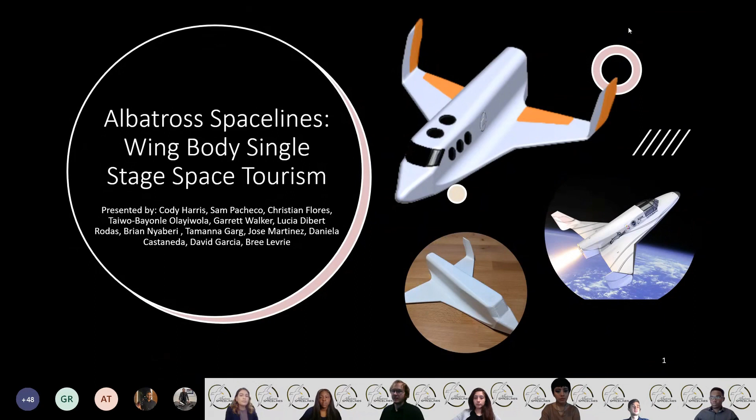Beginning with the history and background of space tourism, we start with the beginning of human spaceflight in the original race to space, 60 years ago, when the Vostok spacecraft carried Yuri Gagarin to an apogee of 320 kilometers. 40 years and 16 days later, Denis Tito would become the first person to pay for a private flight to the ISS aboard a Russian Soyuz.

A few years later, the Ansari X Prize contest was held to encourage the development of reusable and privately funded designs that could lower the overall cost and risks of space travel. With their Spaceship 1 design, Mojave Aerospace Ventures won the $10 million prize. This contest jump-started the space tourism industry that led to the founding of companies such as Virgin Galactic and Blue Origin, and is the basis of the research performed for the analysis of wing body Spaceship UTA.

The specifics of the project are as follows: the vehicle must take off and land horizontally, undergoing rocket-powered flight to reach the Kármán line. During the vehicle's ascent, the 6 passengers and 2 crew members must not experience more than 3 Gs of acceleration, and during descent this limit is raised to 5 Gs.

The vehicle will be based at Mojave Air and Spaceport and will take off and land on its runway. A diagram of the vehicle's flight path is shown, and the key phases for the mission are takeoff and pull-up, boost, coast, apogee, reentry, glide, and landing.

Albatross Spacelines is comprised of a group of 12 engineers, each with a wide range of specialties encompassing 9 separate disciplines. During this project, each member focused on 2 different aspects of the vehicle design process, with 1 member leading each discipline and 1 chief engineer to coordinate the effort.

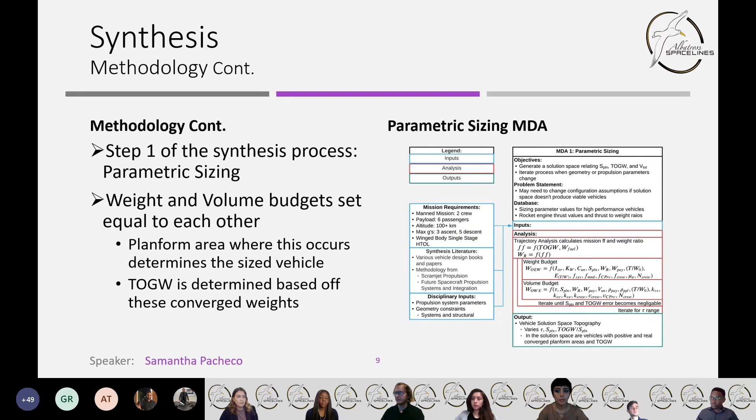Based on the parametric sizing results, a vehicle geometry is then altered such that the geometry of the vehicle matches the converged data. Under the configuration layout process, an existing vehicle geometry will be chosen as the baseline geometry. Once the geometry base has been set, the geometry is modified to accommodate the sized vehicle parameters as a result from the parametric sizing process.

The final step of synthesis is the configuration evaluation. This takes the data and geometries from the previous two steps and analyzes it through a flight phase analysis for the specific mission. At the beginning of this process, a specific flight path is chosen as well as the specific components of the vehicle weight.

The center of gravity and inertias of the vehicle are also calculated here. With these values known, the flight phase analysis can begin. Each flight phase starts with a trajectory and performance calculation and ends with stability control.

Shown here are the flight phases corresponding to the ascent of the vehicle from takeoff to the end of coast. If the vehicle can perform the ascent as required, then the descent calculations start from apogee to landing. The vehicle must meet all requirements set upon it to be deemed feasible.

If the vehicle can complete the flight, then a cost and safety analysis is performed. The purpose of this step is to determine if the vehicle is cost-effective and compliant with any FAA regulations that apply to it. If so, then it remains in the solution space as a feasible vehicle that can complete the mission.

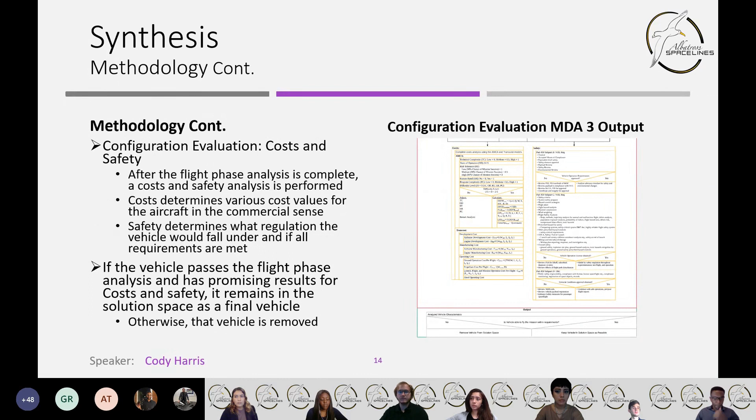With all these vehicles sized, let's now discuss the geometry discipline's impact on the solution space.

The geometry discipline has developed a database of dimensional data for several existing wing-body spaceplanes. The five aircraft that have been selected for analysis are the XCOR Lynx, the Boeing X-20, Virgin Galactic SpaceShip 2, C-251, and the Ariane AS-2.

CAD models of each of the aircraft have been created, and utilizing CAD software in MATLAB, codes are created to, A, scale the dimensions of each vehicle for a given planform area, and B, to generate a valid geometric solution space. The creation of the CAD models and database are aided by a literature review.

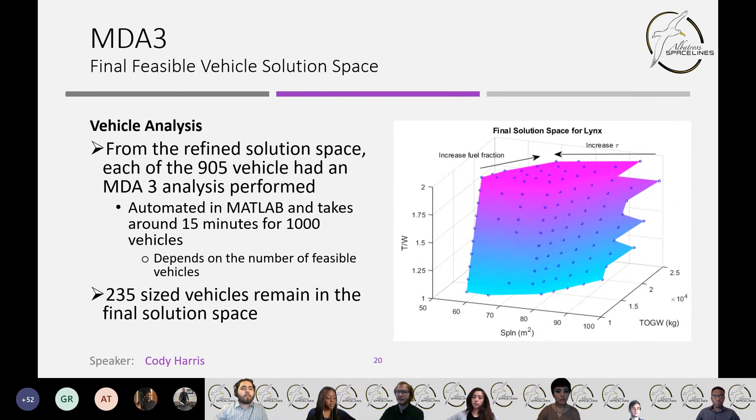This is approximately 24% of the preliminary solution space of vehicles. Of those that couldn't complete the mission, the vast majority failed due to either stability and control or performance issues.

For stability and control, the main issues were losing aircraft stability or controllability at some point during the mission, while performance had the issue of not reaching apogee due to a lack of fuel or experiencing too many Gs during boost. Insufficient runway length is also a factor that resulted in some vehicles being removed.

Compared to the XCOR Lynx and Spaceship 2, this solution space does contain values that are comparable to past vehicles designed for space tourism. Spaceship 2 is a second stage vehicle, which results in its required weight and planform area needed being lower than a single stage vehicle.

The XCOR Lynx was designed for a single passenger that did not experience microgravity as the passengers aboard our vehicle will, so its smaller values are still comparable, but not directly.

Lastly, the design point for this solution space has a tau value of 0.1578, fuel mass fraction of 0.575, and a thrust to weight of 1.05. Again, the Spaceship 2 and XCOR Lynx values are there for comparison.

As mentioned, upon synthesis application of the MDAs to each aircraft geometry, 4 of the 5 aircraft are deemed unfeasible for the mission. The X-20 reported too few feasible configurations, Spaceship 2's feathering mechanisms add unnecessary complexity, and both C-251 and AS-2 are too large to effectively complete the mission.

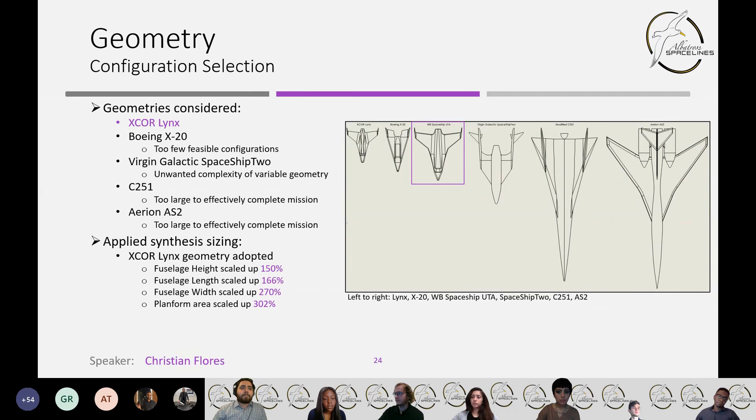This figure shows a top view of the original Lynx geometry and wing body Spaceship UTA.

The purpose behind the weights and balance discipline is to produce the lightest aircraft that will engage in safe flight, select an appropriate aircraft airframe and material composition of the vehicle, determine the maximum takeoff gross weight based on the empty fuel, payload, and crew weight, and evaluate the center of gravity throughout each flight phase in order to produce a CG envelope.

The primary literature used to develop the refined weights estimation methodology were Roskam's and Raymer's aircraft design texts. The primary literature used to develop the center of gravity methodology is Sadraey's aircraft design text.

Key inputs necessary to begin the refined weights analysis will come from the geometry and propulsion disciplines in the form of vehicle geometry and engine specifications, respectively. Once a material type and structural layout has been decided, the weight estimations of the takeoff gross weight and empty weight can be calculated using empirical aircraft component weight equations based on historical data regressions of past vehicles similar in mission to Wing-Body Spaceship UTA.

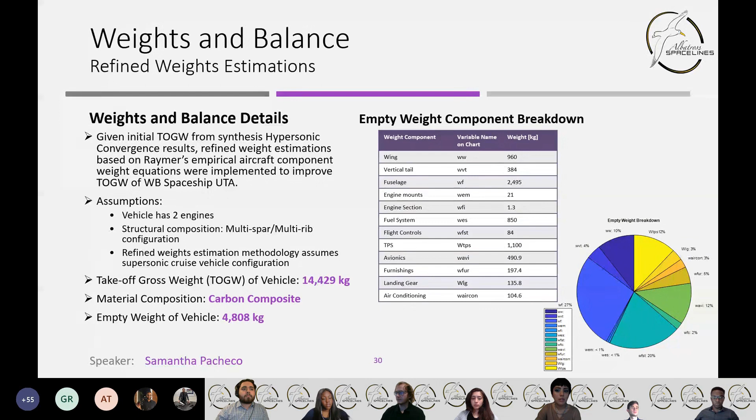The landing gear must withstand the maximum weight of the vehicle when performing various maneuvers during the taxi, takeoff, and landing phases. Therefore, the design, location, and geometry of the landing gear are needed to further analyze the vehicle.

The main literature used to develop the methodology in the IDA on the right is Sadraey's landing gear design buildup. For verification of the methodology, the Lynx landing gear design, a retractable tricycle configuration, is analyzed and scaled to the geometry of Wing-Body Spaceship UTA.

The following images present the main center of gravity locations calculated at the empty and takeoff gross weight of the vehicle. The most aft and most forward CG locations were also calculated to develop the center of gravity envelope. As shown below, once fuel has been added to the back of the vehicle, the CG shifts aft, yet maintains within the bounds of the most forward and most aft CG locations.

Now we will begin the flight phase analysis, starting with the takeoff phase. The primary objective of the takeoff is to verify the vehicle can produce enough lift to actually take off the runway. In addition, the vehicle must also be able to have the elevons rotate the vehicle properly around the main gear. The primary disciplines responsible for this phase are trajectory performance, propulsion, aerodynamics, and stability and control.

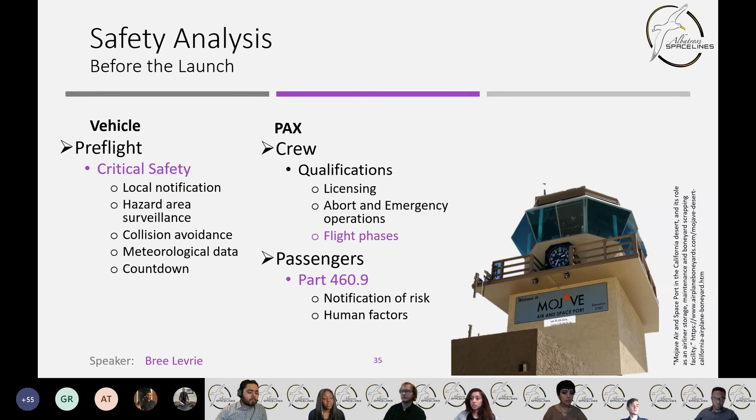The takeoff performance phase is imperative in the design process because it's responsible for sizing the wing of the vehicle. The main objectives of this analysis is to ensure that the vehicle is able to take off within the provided field length. The field length from Mojave Air and Spaceport is approximately 3,800 meters.

Nicolai's takeoff methodology is used to derive an IDA for the takeoff performance, as can be shown on the right. To verify the Nicolai methodology, this analysis is implemented in the Lockheed L1011 TriStar.

The inputs for the vehicle are shown in the top right table. With those inputs, imperative takeoff parameters such as takeoff velocity and total takeoff distance can be determined. Those calculations were compared to verification data, and as can be observed, all the percent errors are at or below 1%. This gives way for the methodology to be implemented on the selected vehicle configuration.

Wing-body Spaceship UTA is a significantly smaller vehicle compared to the L1011 TriStar. Hence, it was expected that the various takeoff parameters can be lower in comparison. As can be observed in the input table, the maximum lift coefficient is much smaller due to the smaller wingspan. Nevertheless, Wing-body Spaceship UTA takes off at a Mach of 0.21, which is well within the typical aircraft takeoff speed.

The selected vehicle configuration has a shorter takeoff distance of 1,773 meters. Nonetheless, the vehicle is able to take off with plenty of runway to spare. Now for the propulsion team to elaborate on the vehicle propulsion and the takeoff phase.

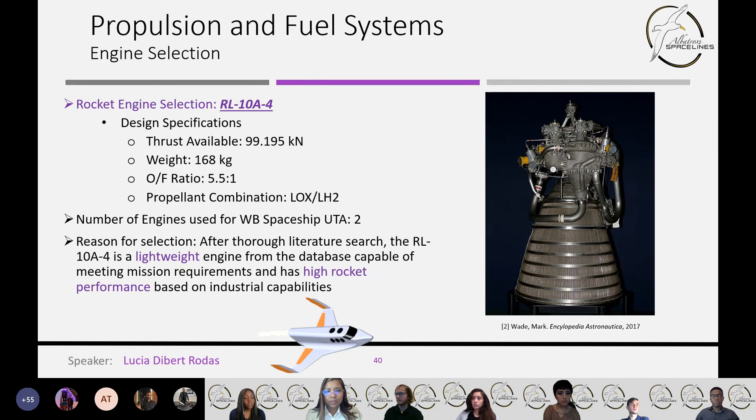Next will be aerodynamics to discuss the aerodynamic analysis for takeoff. The aerodynamic analysis at takeoff focuses on verifying that the lift generated will overcome the takeoff gross weight of the vehicle. A methodology and IDA diagram were developed as shown with primary literature methods including the US Stability and Control DATCOM and Spencer.

The subsonic lift and drag wing pitching moment slope methods were verified using the Space Shuttle data and a developed database of delta wings, and most percent error values were less than 15%. For Spaceship UTA, the necessary aerodynamic values were determined, and it was verified that the wing produces enough lift for takeoff.

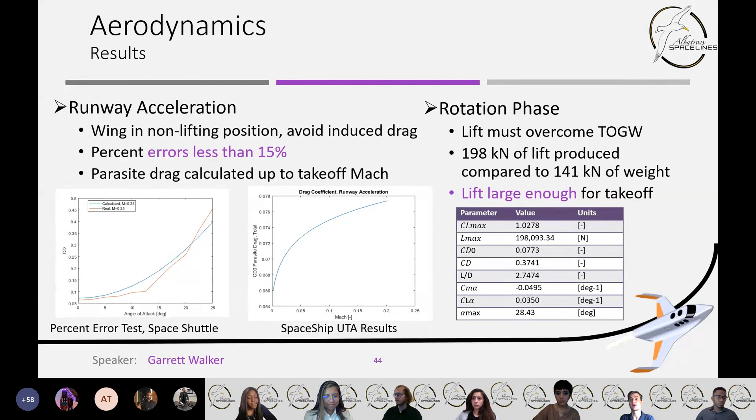And now on to stability and control. For the takeoff phase, the most critical part is ensuring the vehicle will be able to rotate the vehicle to the proper angle of attack required for takeoff.

The required lift and pitching control authorities are presented, and these variables were used to estimate the size of the elevons required based on the necessary pitching and lift control authorities by the elevon. The elevon control surface area was estimated to be approximately 11 meters squared with an elevon deflection of 15 degrees required to pitch up the vehicle.

And now for the next phase. The objectives of the boost phase involve determining the optimum trajectory that allows Spaceship UTA to achieve 100 kilometers with adequate thrust and stability. Furthermore, the loads experienced during this phase must not exceed 3 Gs.

The primary disciplines responsible for achieving these objectives are trajectory and performance, propulsion, aerodynamics, aerothermal, and stability and control.

To develop the trajectory for Spaceship UTA and analyze the performance during flight, the methods selected and verified were Vinh's trajectory model and the Nicolai and Raymer performance analysis methods. The Space Shuttle and X-15 were selected as verification vehicles because of their low aspect ratio wings and high altitude performance capabilities. Additionally, the X-15 weight was close to the goal weight of the Spaceship UTA. Based on the closeness of the calculated and literature trajectory plots, the methods were considered viable for the Spaceship UTA's analysis.

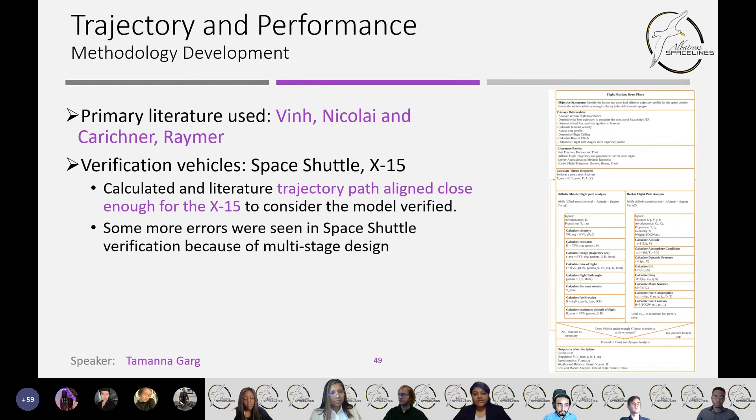After constraint analysis, results dictated that in order to achieve the mission altitude of 100 kilometers, Spaceship UTA must fly on a flight path angle of 60 degrees and requires a thrust of nearly 147 kilonewtons. With these characteristics, the vehicle achieved a propellant mass to total mass ratio of 0.575, which is in the average range for the vehicles of this size.

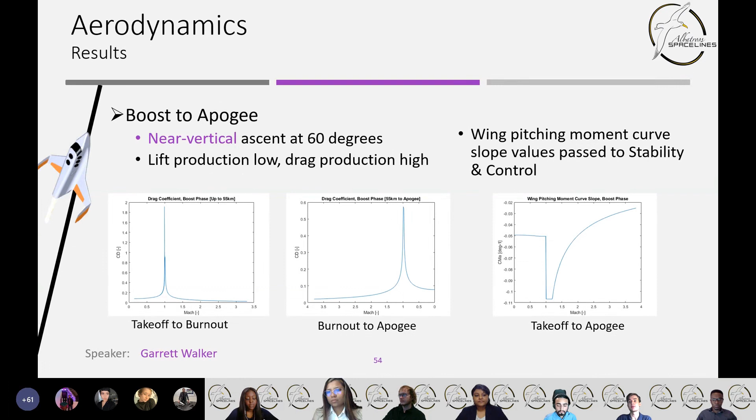From literature review, it is learned that one of the limits of the flight envelope is aerodynamic heating. At high Mach numbers, an aircraft heats up due to the conversion of kinetic energy of the air into thermal energy. The increase in thermal energy is represented by the increase in temperature, which occurs due to the heat transfer from the air to the aircraft through convection.

The critical regions of the vehicle are the stagnation points and lower surfaces. Because of this, the Aerothermal Discipline is in charge of estimating the heating rate at the critical regions of the vehicle. The vehicle used for method verification is the Space Shuttle.

David, I can't hear you.

For the boost phase ascent, US Air Force DATCOM was used as the main reference and obtained the roll and yaw stability derivatives. Delta wing aircraft found within the references of DATCOM were used as verification of the DATCOM equations and methodologies. Errors would range between 5 to 15% depending on the wing configuration and other various required geometric inputs. Aerodynamic parameters such as the wing pitching moment and the coefficient of lift with respect to the angle of attack were obtained from the aerodynamics discipline.

The vehicle was found to be stable for the 3 stability parameters in the subsonic regime. However, as the vehicle crossed into the supersonic regime, the vehicle became less stable, yet still within the static stability requirements. This was expected and can be mitigated through an active control system as seen in numerous modern aircraft and wing body configurations. Now to the next phase.

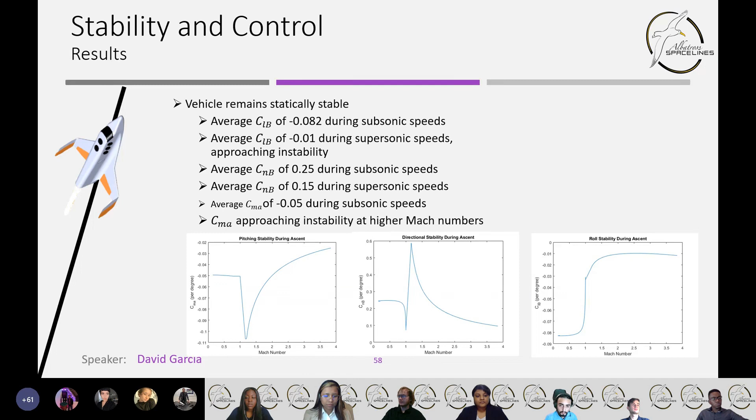In unpowered ascent phase or coast, the disciplines of trajectory performance and weight and balance ensure that the vehicle maintains enough momentum to reach apogee and that the loads remain below 3 Gs.

Once the engine shuts off and the vehicle enters its unpowered coast phase, the weight after the boost phase was recorded. Because the entirety of the fuel was consumed during its burn time, the weight after the boost phase comprises only the empty weight, RCS fuel, weight of the passengers, and weight of the crew, at a value of approximately 7,095 kilograms. The CG shifts forward approximately to the location of the empty CG location as the back of the vehicle has become lighter.

And now for the phase that everyone enjoys the most, apogee. During the zero gravity phase, Albatross Spacelines aims to maximize the amount of time customers get to spend in the zero-G environment. Additionally, it has determined how much fuel is needed for the reaction control system and the corresponding thrust forces. The disciplines responsible for these calculations are trajectory performance and stability and control.

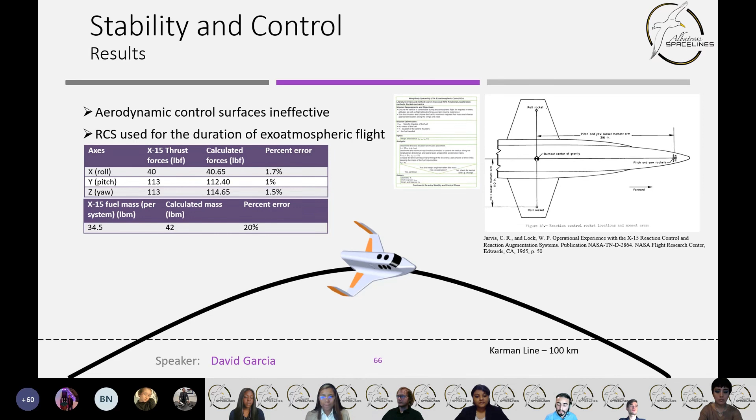Here, the required thrust forces of the reaction control system for the 3 rotational axes are given, along with the minimum required mass of the system propellant of 200 kilograms.

With the passengers strapped back into their seat, we can begin reentry. In this flight phase, we ensure that wing body Spaceship UTA is able to maintain a descent trajectory with an angle of attack high enough for it to reach back to the runway while keeping load factors under 5 Gs and remaining stable. Additionally, it is imperative to develop a thermal protection system that is able to withstand the high temperatures associated with atmospheric reentry. The primary disciplines that work on these objectives are trajectory performance, aerodynamics, aerothermal, and stability and control.

The trajectory and performance discipline will be in charge of determining key values that will be used by aerodynamics, aerothermodynamics, and stability and control disciplines. Griffin methodology was used to calculate the velocity profile and associated altitudes, and Regan methodology was used to find the deceleration values and the time.

The reentry analysis begins at apogee and will fall down into the range of 45 kilometers. This is mainly due to assumptions that were made within the chosen methods. A reentry skip maneuver is done for the Spaceship UTA mission, which will allow for an increase in speed and will give a max Mach number of 3.57.

This occurs at a higher altitude. This also ensures that the G-force deceleration that is felt will peak at 2.3 Gs and will then have a second peak value. This G-force value is smaller than the allowable max 5G limit set by the mission, and the total reentry time will be 423 seconds, or roughly 7 minutes.

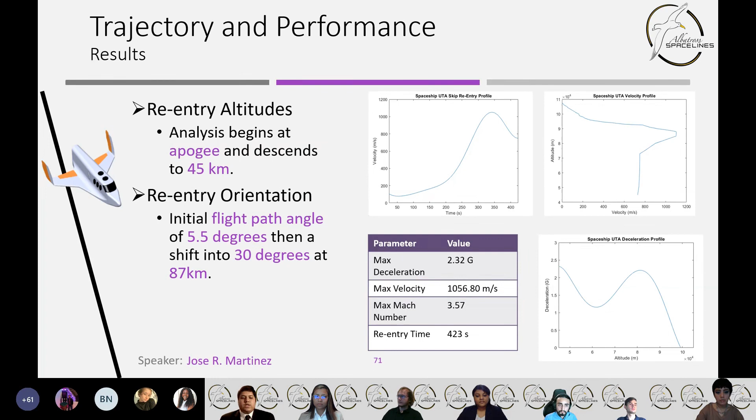Now I'll pass it on to the trajectory of the glide phase. A trajectory and performance glide methodology was developed based on primary literature sources, including Raymer, Roskam, and Nicolai.

The space shuttle was used as a surrogate vehicle to verify the accuracy of the velocity time and velocity altitude history methods, and most percent error values were below the 15% threshold. The method was used to calculate the glide velocity profile history for Spaceship UTA.

During glide, Spaceship UTA flies a constant lift-to-drag ratio equilibrium flight from 45 kilometers down to the landing approach, where it is operating at CL max before touchdown.

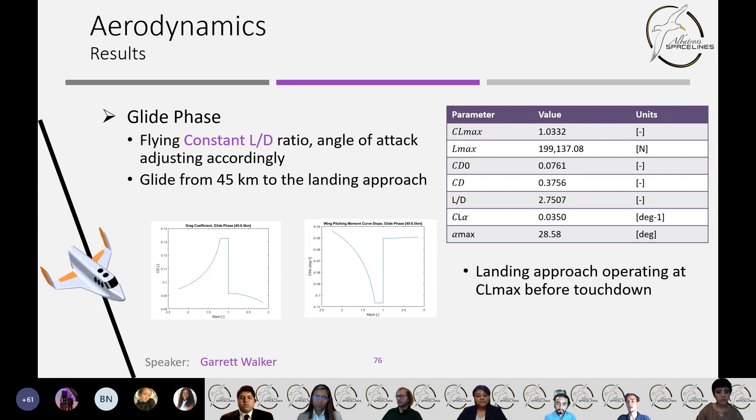And now on to aerothermal. The aerothermal discipline is in charge of calculating heat flux values and surface temperatures during the descending phase. The calculations will then be taken into consideration when sizing the thermal protection system.

Quinn methodology will be used to calculate the heat flux profiles experienced, and Fink methodology will be used to calculate the surface temperatures.

The heat flux profile for the lower surface of the Spaceship UTA vehicle was calculated assuming a free laminar flow, which will give a max value of about 62 kilowatts per meter squared. But the most important heat flux value that should be checked would be the stagnation heat flux, which was calculated to have a max value of 113 kilowatts per meter squared.

The max surface temperature measured for the lower surface of Spaceship UTA was 880 Kelvin. With these major aerothermal forces, a thermal protection system will be required for this mission.

But due to a carbon-based structure, the thermal protection system can be limited to the most vulnerable parts of Spaceship UTA. This includes the nose, the leading wing edges, and the vertical stabilizers. The material chosen for the TPS was carbon-reinforced silicon carbide.

The main reason this material was chosen is due to the ceramic matrix composite, which gives it low weight and high thermal conductivity. It is also oxidation resistant, which is a bonus. The total thermal protection system weight applied to Spaceship UTA is approximately 1,100 kilograms.

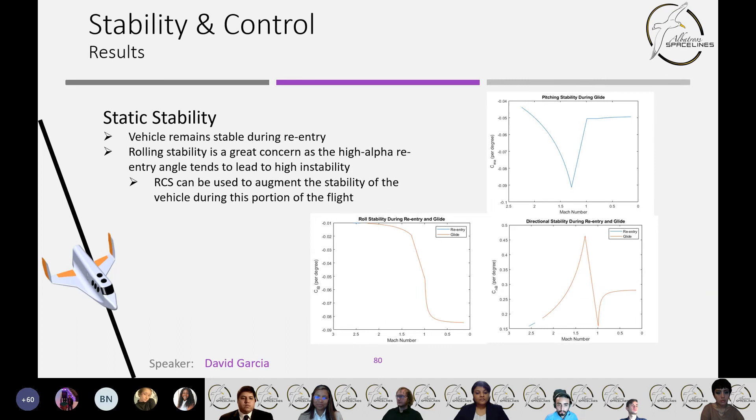Finally, in the venture to come back home to Mojave, trajectory and performance must ensure that the landing phase sees the vehicle approach at a safe speed and not stall. Stability control helps complete this objective by sizing the rudder to meet Part 25 landing requirements.

The main objectives of the landing phase are to ensure that Spaceship UTA can complete a safe landing at Mojave Air and Spaceport. The main methodology chosen was ROSKAM, which gives different velocity and range values.

The main velocities calculated in the landing phase are the approach and touchdown velocities. The most important factor is to ensure that the stall velocity will always be below these values. The stall velocity was calculated to be 33.38 meters per second, and the landing field length was calculated to be 1,146.5 meters. This means Spaceship UTA will be acceptable for landing at Mojave Air and Spaceport.

Landing analysis for aerodynamics focuses on determining aerodynamic values on approach through touchdown. Similar methods were used as in the takeoff analysis and applied to the landing analysis.

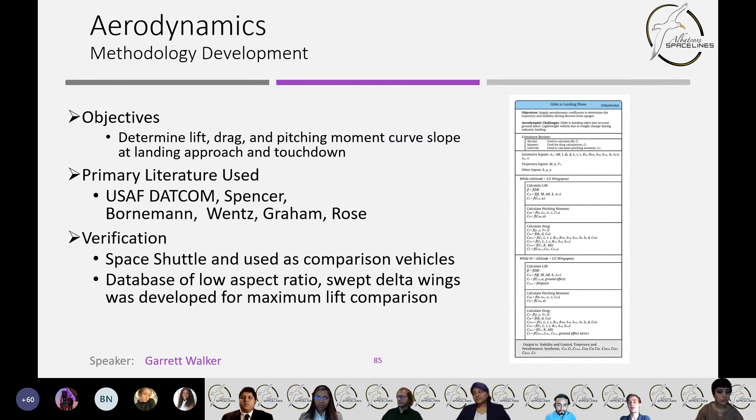CL max produced during landing is sufficient due to the loss of mass from the fuel burned. The calculated aerodynamic values were output to the necessary disciplines. Now on to stability and control.

It was decided that wing body Spaceship UTA was to have all moving tail surfaces due to the supersonic flight capabilities and need for the vertical tails to be effective during supersonic flight. With this, Spaceship UTA was evaluated to be able to perform a safe crosswind landing with a crab angle of 4 degrees and a rudder deflection of 2 degrees for a crosswind speed of 15 knots.

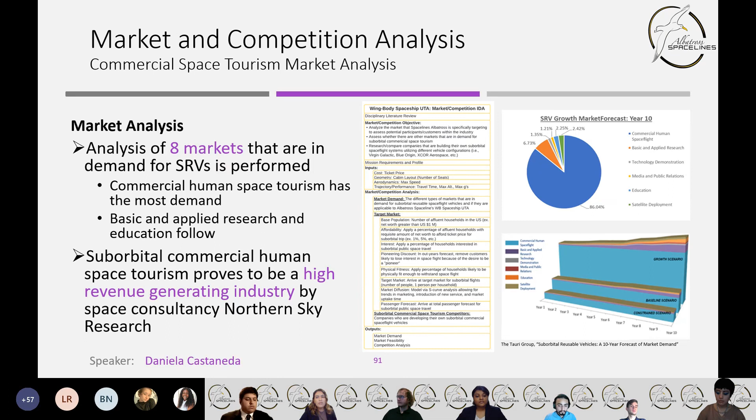Virgin Galactic is the main competitor that Albatross Spacelines will be competing against, in which their traditional configuration of a 2-stage vehicle is utilized, which resulted in lighter vehicle weight. However, Albatross Spaceline's attempt at a single-stage horizontal takeoff and landing rocket-powered spaceflight vehicle proves to be highly competitive against Spaceship 2 with the current technology.

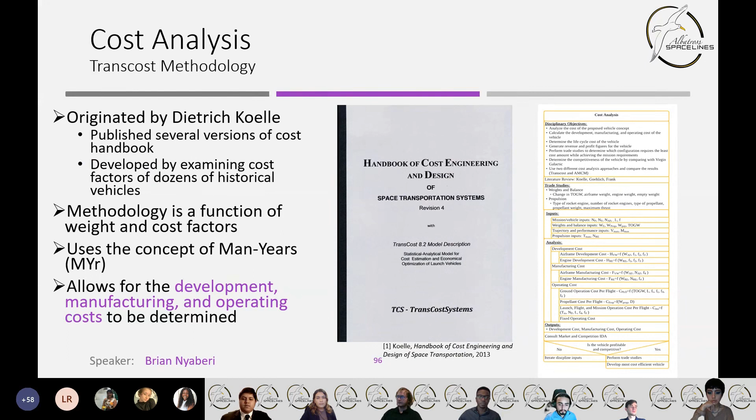With verification of the transcost method, the analysis was applied to the final configuration of wing-body Spaceship UTA. The development cost is $1.5 billion, and the manufacturing cost is approximately $322 million for one vehicle. This is pricier than Spaceship 2, but was expected due to the higher weight and more engines. However, the operating cost per flight is lower because of the difference in propellant.

Using liquid propellant is significantly less expensive compared to solid propellant.

With the ticket price per customer set to $225,000, Albatross Spacelines also generates a higher profit than Virgin Galactic. This analysis shows that a single-stage to suborbit system is financially viable, even more than the current two-stage system. Now I'll pass it to Bree for the final safety analysis.

The objective of the safety analysis is to ensure that the vehicle, crew, and passengers, surrounding environment, and company personnel abide by regulations set in place to maintain a controlled area and a controlled flight for the intended mission. This includes applying the correct regulations for both ground and flight safety.

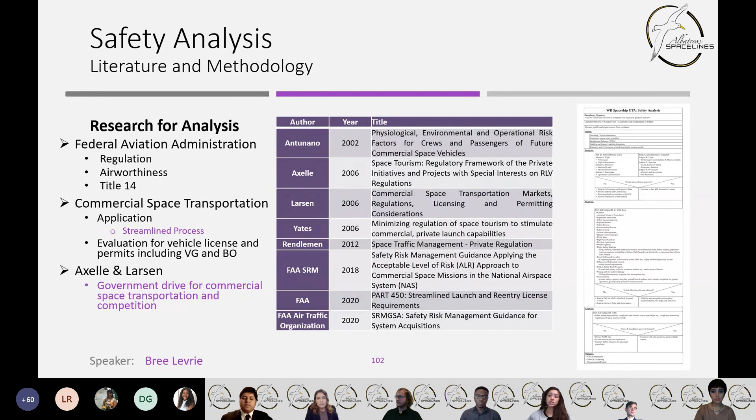The calculated and verified ground run from trajectory and performance coincides with that of the Mojave runway to be used. For the takeoff flight phase, the launch angle limits were in accordance with Part 417-125, where the nominal launch elevation angle did not exceed 85 degrees.

For the powered ascent boost part of the launch phase, the gravitational force acting on the vertical plane of the body, or amount of G's pulled, was less than the limits at which there is a potential compromise within the body.

Human safety at Apogee is what the two-week training prior to the flight prepares passengers for. This point in the flight phase is where effects of radiation and microgravity come into concern. Solar or galactic cosmic radiation is considered, but for the mere time of 4.5 minutes spent at Apogee, this does not imply that passengers are susceptible to high radiation doses.

The microgravity, however, can have musculoskeletal effects, disruption of bodily fluid, gastrointestinal effects, and also cardiovascular effects, which means that, unfortunately, grandma cannot enjoy a ride on wing-body Spaceship UTA.

For the safety aspect included in the re-entry and glide phase, Part 450 was followed. It states that the permanent re-entry site must be declared, and per the mission requirements, Mojave Air and Spaceport is licensed and cleared for re-entry and landing.

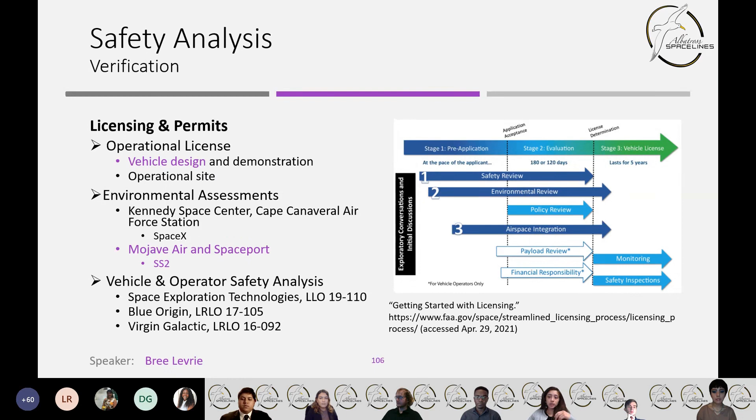Overall, the design point chosen by Albatross Spacelines is capable of completing the mission within the given requirements while also being cost-effective and following all FAA regulations. If this vehicle were to enter the space tourism market, it would undoubtedly provide competition to Virgin Galactic's Spaceship 2. With that, that concludes Albatross Spacelines' presentation. Thank you.

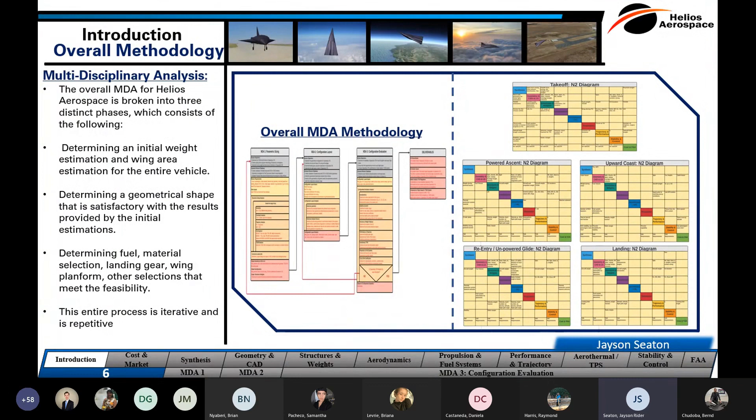I will now hand the presentation over to our cost and market team. Thank you, Jayson. My name is True, and I'm the lead engineer for the cost and market discipline.

The rising era of the space age promises enormous potential demand for space tourism services, sparking business competition between travel companies while introducing new major markets for manufacturing and operating companies to enable true space activities. The topics addressed in the cost analysis include identifying the current competitors for suborbital space tourism, how much it will cost to develop, produce, and operate Spaceship UTA in terms of its launch cost and ticket price per flight. Additionally, past to present cost models and literature on space access vehicles are reviewed to determine the challenges of analyzing cost for a suborbital vehicle, the design choices that impact cost, attempts to maximize competitiveness, and how Spaceship UTA compares to current market standards.

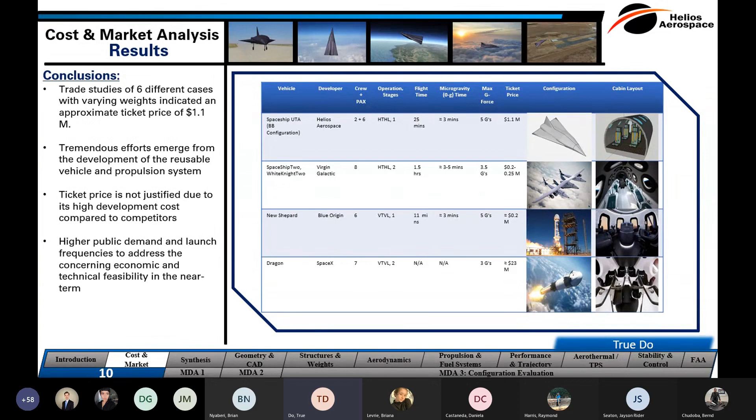Thank you, True. The synthesis discipline oversees the sizing of the aircraft, where the objective is to determine baseline design parameters that are required to build the geometry of Spaceship UTA.

In this phase, we will discuss topics such as how much the takeoff weight is estimated to be, what wing planform area is required for our vehicle, and what the total volume constraints are to integrate the entire vehicle to the geometry team. The overall design methodology for our vehicle, as mentioned in the introduction, was broken down into 3 phases.

As seen in the bottom tab, synthesis is the first phase of the design process. Part of the task of this discipline is to develop an overall design methodology, accomplished by creating necessary parameters from each discipline by flight phase, such as the time the paying customer will have in zero gravity.

Before jumping into the analysis, let's look at how the weight range was determined. The synthesis discipline looked into several suborbital vehicle configurations, such as sounding rockets, second-stage systems, and experimental data obtained from New Shepard. A linear trend line was approximated between these data points to estimate where Spaceship UTA's weight should be as a function of thrust. It was determined that Spaceship UTA would be within a 15,000 to 30,000 kilogram range.

Let's look at the results now. To verify the sizing analysis of Spaceship UTA, the SR-71 was sized to ensure that the dry weight, total volume, and upper hypersonic convergence parameters were estimating a percent error within a reasonable ballpark.

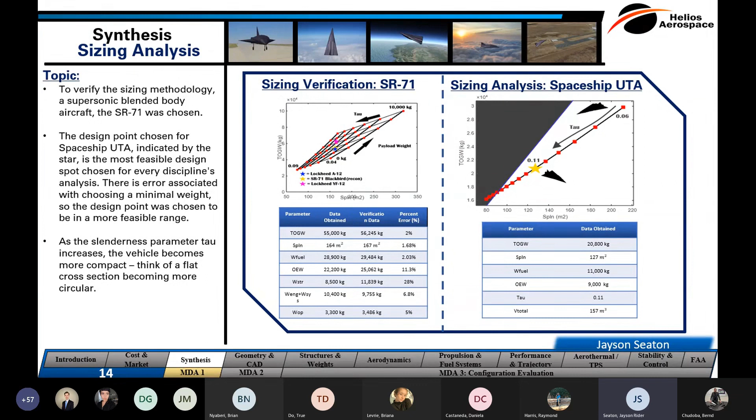I will now pass this presentation to the configuration layout team, which handles the second phase of the conceptual design process.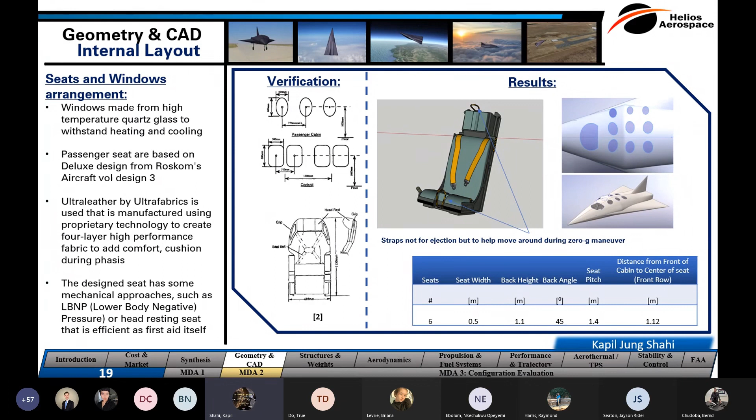The most relevant but challenging topic that should be considered is the sightseeing, passenger cabin layout, and some extra space for experiencing weightlessness. The internal cabin layout was finally designed, and the CAD model along with some renderings can be seen on the right side compared to that of the SpaceShipTwo design.

The bottom table shows the final exact dimensions of the internal layout. Next, Jose will be talking about wing selection.

Thank you, Kapil. In order to get up to speed with the shaping of the wing planform, a historical database of previous high-speed and space-access vehicles was developed.

Utilizing historical design case studies, one can obtain the lessons learned and valuable design guidelines that have been acquired over generations. A total of 12 aircraft were selected, which include the SR-71, Concorde, XB-70, Vulcan B-1, Sanger 2, and the X-24B. Geometrical data was obtained and trends were analyzed.

From these case studies, it was found that the majority of the high-speed aircraft incorporate a single or double delta wing with sweep angles ranging between 52 and 81 degrees, while aspect ratios range between 1.09 and 2.84. From theory, it was also determined that a subsonic leading edge was desirable for the entire flight profile.

This will result in a reduction of wave drag, which is ultimately desirable in order to maintain some excess thrust during the powered ascent phase. Failure to do so would result in a need for a larger propulsion system, which would increase the weight and so on, thus triggering an undesirable positive snowball effect.

Ultimately, Spaceship UTA's wing shape was selected to be a standard delta wing with a leading edge sweep of 74 degrees. This would ensure a subsonic leading edge throughout the flight profile, as well as ensure sufficient subsonic aerodynamic performance for critical phases such as takeoff and landing.

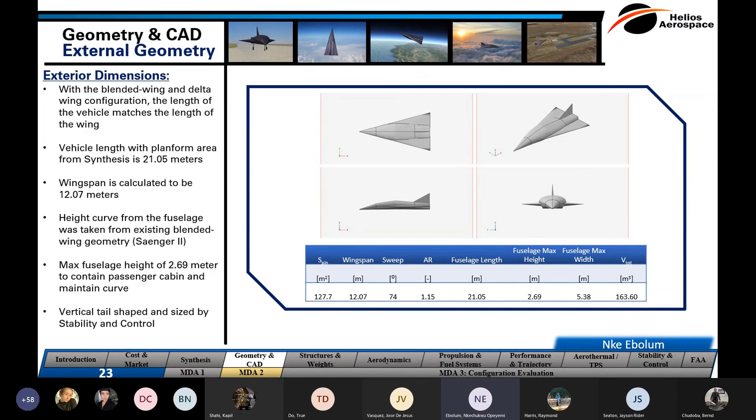For the interior layout, the size of the passenger cabin was determined prior to determining the exterior geometry to ensure the fuselage met the size needed to contain the cabin. The location of the cockpit was placed to give the pilots the best field of view required for passenger vehicles.

As the nose of the vehicle is larger than traditional vehicles, an external vision system will be necessary for the pilot's view forward. The sizing and shape of the fuel tanks and engine were determined by the propulsion discipline and passed along to the geometry discipline, placed within the exterior geometry.

The landing gear dimensions and placement were done in collaboration with the weights and balances discipline to determine the best location of the wheels and stress during takeoff and landing.

In the event that the interior components do not fit within the exterior geometry of the vehicle, the design process will then be iterated back to the determination of the locations of the components or the exterior geometry determination to ensure the geometry can fit the components while maintaining the sizing values from synthesis.

I'll now hand it over to Alejandro for weights.

Thank you, NK. Hello, my name is Alejandro Rodriguez, and I'm the Structure and Weights Team Lead. The Weights, Balance, and Structure Discipline's main objectives are to determine and track the weight and center of gravity location through all flight phases, as well as to determine the structural composition of the vehicle.

An overall discipline IDA was created to detail the methods to be used for the analysis necessary for the discipline. The disciplinary analysis is divided into 4 subdisciplines: weights, landing gear design, balance, and structure. Each IDA details the flow of inputs and outputs between subdisciplines, as well as the flow of inputs and outputs with other disciplines. I'll now hand it over to Ricardo for weights and landing gear analysis.

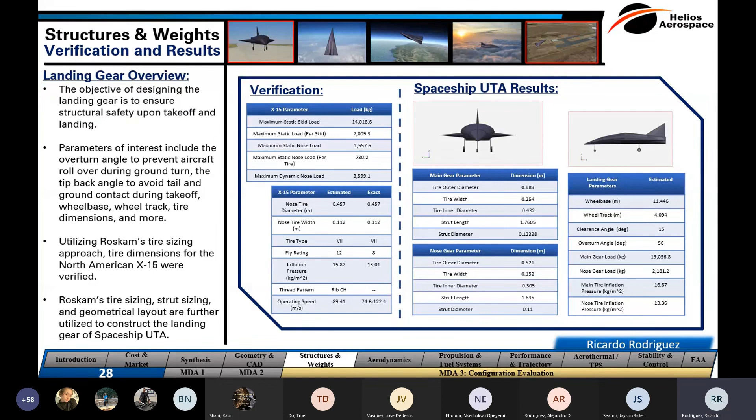Thank you, Ricardo. The determination of the center of gravity location begins with measuring the distance from a reference line to each component's center of gravity. In this case, the nose of the aircraft was chosen as the reference line. Using the calculated weights and these measured distances, the sum of all the moments of the vehicle's components can be determined. The total moment calculated is then divided by the total weight of the vehicle to determine the location of the center of gravity.

Using this method, the center of gravity location of the vehicle was found for all flight phases. At takeoff, the center of gravity is located at 12.74 meters aft of the nose, equivalent to 41.16% of the mean aerodynamic chord.

After liftoff, the landing gear is retracted. This shift in the landing gear's center of gravity shifts the overall center of gravity slightly aft. As fuel is consumed through the takeoff and powered ascent phases, the vehicle becomes lighter in the rear section where the fuel tanks are located. This shifts the center of gravity forward to about 10.85 meters aft of the nose.

I'll now hand it over to NK for structures.

Focus on the internal structure of the vehicle was placed on determining a possible structural configuration and the materials feasible for design. For material analysis, the materials were compared to one another through the stress-strain curve, their potential resulting weight, and their compatibility with one another.

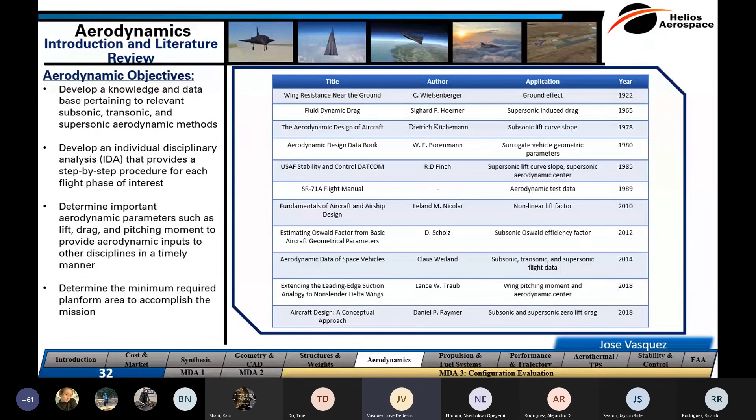Each flight phase has its own unique challenges and method applications. For example, the takeoff and landing phase consists of subsonic aerodynamics with considerations to ground effect and landing gear contribution. The powered and reentry phases consist of supersonic, transonic, and subsonic aerodynamics. Thus, handbook methods regarding these speed regimes must be obtained and verified in order to accurately model Spaceship UTA's aerodynamic performance throughout the entire flight profile.

For the verification process, the surrogate vehicles selected were the SR-71 and Space Shuttle Orbiter. The SR-71 was selected due to its blended body configuration, while the Space Shuttle Orbiter was selected to serve as a basis for the aerodynamic trends during the supersonic and subsonic glide.

Several subsonic methods were calculated and compared against test data. Ultimately, the lift methodology developed by Kuchemann and Raymer's drag buildup were selected for the subsonic aerodynamic tools.

In a similar fashion, the supersonic methods collected were tested and compared against available test data. For the supersonic regime, DATCOM's lift estimation process as well as Raymer's drag buildup led to the least amount of percent error, thus being selected for Spaceship UTA's aerodynamic model.

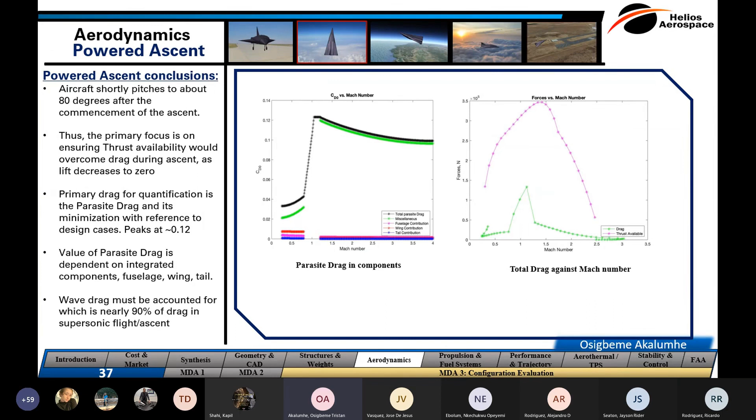Now I'll pass it back to Jose, who's going to talk about the reentry. Once the passengers have enjoyed the view of Earth from space, the vehicle begins its re-entry trajectory.

The aerodynamic coefficients calculated during this phase were then passed on to the trajectory and performance team in order to determine the best flight trajectory that meets all the design requirements imposed. I will now pass it on to my colleague Johnny to discuss the unpowered glide and landing phases.

Thank you, Jose. During the unpowered glide phase, L over D would be the most important characteristic. L over D will be used to maximize the range to return to the spaceport. L over D max will shift slightly as altitude changes.

To maximize the range, the vehicle should stay between angles of attack of 6 to 8 degrees. If the velocity decreases too much, the vehicle may angle down to gain additional velocity. The neutral point was determined to be 13.3 meters from the nose of the vehicle.

During the landing phase, touchdown velocity was calculated to be 95.5 meters per second. The maximum angle of attack for flare was reported to be 15 degrees. At this angle of attack, the usable CL max with ground effect included was determined to be 0.5587.

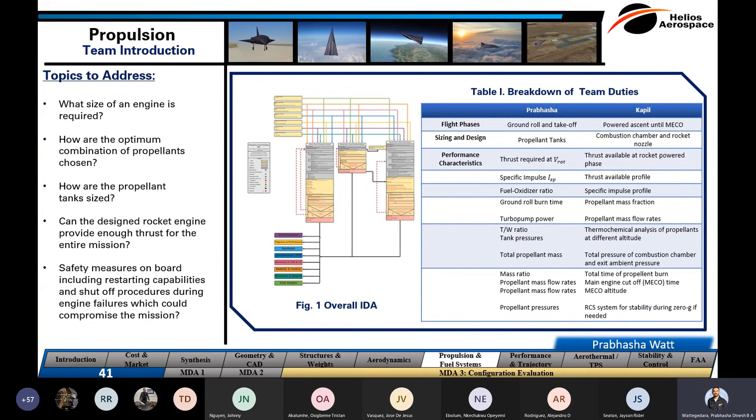Following extensive research, it was identified that a commercially off-the-shelf engine would do the job together with certain modifications to the overall propulsion system. To select the best engine, a comprehensive knowledge-based and database literature review was conducted to analyze the engine performance of commercially available engines. This literature review also included a separate section to oversee the propellants that can be used. Primary sources used in the engine design process were Mattingly, Sutton, and Breining's engine design manuals.

First, let's take a look at how the propellant tanks were designed. When designing propellant tanks, the primary properties that were looked at are the material, the weight restrictions, fuel and oxidizer volume requirements, and the tank bay area available.

Several material properties were analyzed for stainless steel, aluminum, carbon fiber, and titanium alloys. The best strength-to-weight material was titanium, but careful considerations were used in preparing the shell membrane to have maximum strength to withstand high in-flight pressures and ruptures. The interior of the tanks were equipped with grooved baffles to prevent sloshing and turbulence of the fluids inside.

The maximum pressure experienced by the tanks can reach up to 72 psi. Hence, a leak-before-burst concept will be installed, where the ports will exert pressure relief and notify the pilots of a potential hazard.

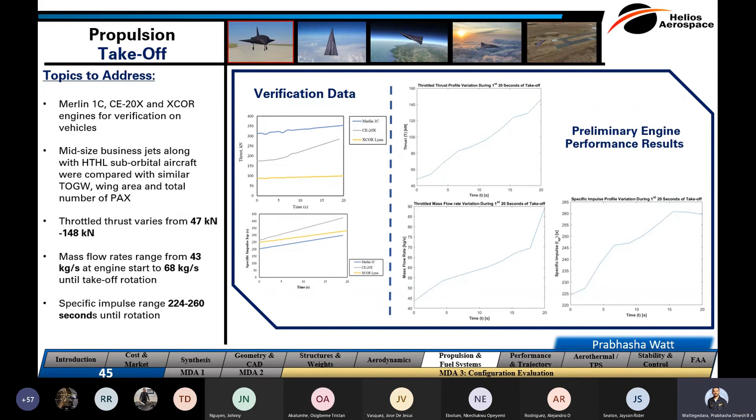Thanks, Prabhasha. My major purpose is to analyze and design the Spaceship UTA's propulsion system during the ascent phase after takeoff and ground roll. Primarily, propellant selection analysis was done on different propellants based on storability, economy, toxicity, and total energy content. RP1 and liquid oxygen combination was selected to be the best for the mission and finalized with Prabhasha.

Important parametric analysis was done using NASA CEA codes to get some conversion points for further calculation, as seen on the right. This can be verified from the fact that most suborbital vehicles developed or proposed use the RP1 liquid oxygen combination the most, from our literature review.

Since the engine sizing was based on an orbital Merlin 1D engine, the sizing had to be done to meet the suborbital mission requirements.

For the nozzle design, the method of characteristics was used, which is a numerical procedure for designing the contours of the rocket nozzle at the optimum expansion point.

Finally, the table shown consists of important output dimensions for the method of characteristics, for further calculation.

Like the Merlin 1D, this uses pintle injectors for injecting the propellants, and along with the use of turbopumps and valves, can throttle the flow rates, ultimately throttling the thrust of the rocket from 30% to about 90%.

Throughout the flight, based on the flight angle and load requirements from the stability and control discipline, the propellant flow rates were throttled, ranging from 68 to 98 kg per second.

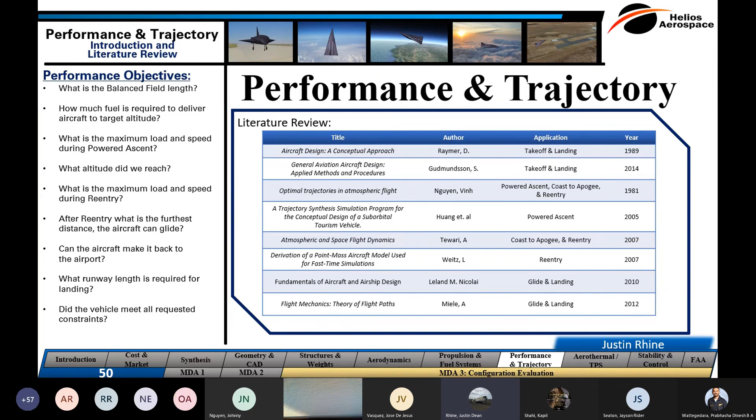The entirety of the method is displayed within the following master IDA. This particular discipline requires a wide range of inputs from varying disciplines and reports results to many of these respective disciplines. I would like to hand off to Osigbeme Akalumhe to discuss takeoff phase for the blended body configuration.

Thank you, Justin. So for our vehicle, we want to ensure that we can take off in an appropriate time and distance. With the provided inputs from the propulsion team, we were able to assess the amount of effort expended in this phase while meeting safety requirements as set by FAR 25.

Fortunately, the takeoff maneuver, which includes the ground roll, rotation, and transition, happens in about 40.91 seconds while burning a total of 1,763 kilograms of fuel.

An additional advantage with this vehicle is the fact that the balanced field length is within limits of what is available at the various spaceports in America. So this is actually a pretty good, excellent performing vehicle.

And now I'd love to pass it on to Justin, who's going to talk more about the powered ascent. Thank you, Ozzy.

For the next three phases, a 3-degree-of-freedom simulation for a point mass is used to track the vehicle. For verification of the powered ascent phase, characteristics of the SR-71, Kuchemann's lift-to-drag barrier equation, and thrust data from the propulsion team was used. The verification showed strong correlation with a trajectory synthesis report using the energy state approximation method described in Vinh's text.

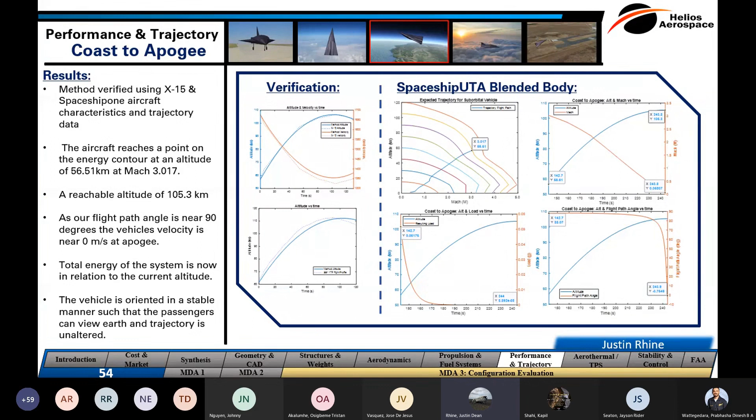Next slide, please. The method and verification for reentry is similar to the coast to apogee phase. X-15 and SpaceShipOne data is used to verify our method. The verification results correlate strongly with each vehicle's known inputs and trajectories.

For the blended body configuration, passengers experience a total microgravity time of 3 minutes over the duration of the flight. At 55 kilometers, passengers reach the highest speed during reentry. The Mach number at this point is approximately 2.9. Upon reaching this speed, the vehicle soon after begins decelerating.

The maximum load experienced by the passengers is 5 Gs. As the vehicle reaches an altitude of 22 kilometers, it has traveled approximately 30 kilometers from the airport and must now glide safely back. I'd like to hand off to Johnny Nguyen for glide and landing.

Thank you, Justin. The methodology used to analyze the performance of the vehicle during glide was verified using data from the conceptual space plane. The range must be maximized during this portion of the flight. Given the aerodynamics of the vehicle, it was determined that Spaceship UTA will be able to glide for a maximum of about 14.5 minutes and 123 kilometers once the vehicle re-enters the atmosphere.

This range is more than enough to bank and return to the spaceport. The average sink rate was found to be 22 meters per second. The average flight path angle was determined to be about 9 degrees. Next slide, please.

For the landing phase, stall velocity was calculated to be about 83 meters per second. The vehicle will need to stay above this velocity. During the approach segment, the vehicle will have a flight path angle of about 5 degrees. It will then flare at 6 degrees to touch down. The vehicle was determined to be able to touch down at 95 meters per second and complete the ground roll within 1,300 meters. This is well within the limits of Spaceport America and Mojave Air and Spaceport.

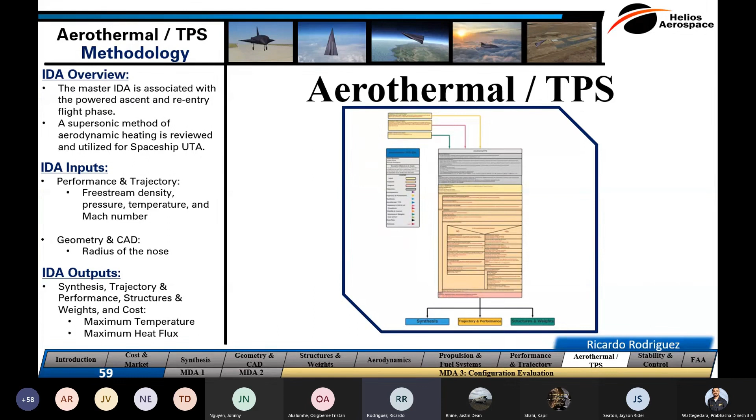Next slide, please. The objective of the thermal protection system is to protect the vehicle from aerodynamic heating, similar to Spaceship 1 and Spaceship 2. Spaceship UTA will utilize carbon fiber reinforced epoxy with a Nomex honeycomb core in low temperature regions. In high temperature regions such as the nose and wing leading edge, phenolic resin will be used due to its high heat tolerance. Next is Justin Rhine discussing the verification and results for Spaceship UTA.

Thank you, Ricardo. It was determined that the nose stagnation temperature and heat flux were of primary interest, as other areas of the aircraft were proportional, if not considerably lower. The method utilizes the convergence of convective and radiative heat rates through the calculation of the Stanton number for the nose of the aircraft. Verification was completed with known heat data for the X-33 and X-34 aircraft and trajectories. The results show strong correlation for supersonic speeds.

The results for the blended body configuration show a maximum temperature of 589 Kelvin during the powered ascent phase and a maximum temperature of 629 Kelvin during reentry. This analysis shows that the temperatures are well within the limits of the thermal protection system. I would like to hand off to Deji for stability and controls.

Thank you, Justin. During development of the Spaceship UTA blended wing body configuration, one discipline is tasked with analyzing vehicle motion throughout the mission profile. The stability and control team breaks down the blended wing body into 3 axes: longitudinal, lateral, and directional.

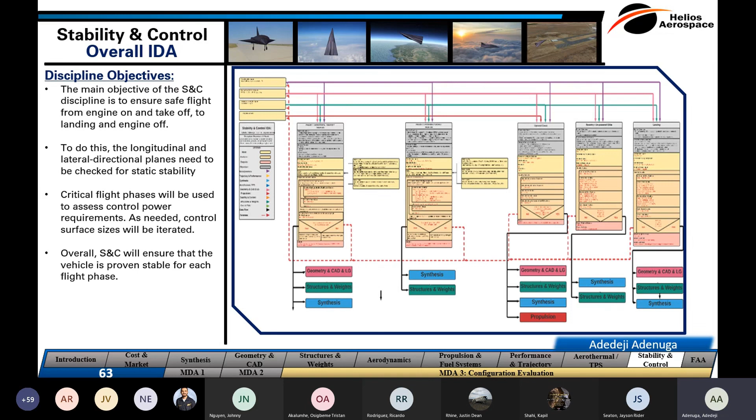Spaceship UTA blended wing body configuration features elevons and a rudder as primary control surface effectors. Left and right elevon deflection administers vehicle control in the longitudinal plane, and by differential deflection, vehicle control in the lateral plane is administered. The rudder takes care of directional control. The well-known method of volume coefficients is used to size the elevons and the vertical tail which houses the rudder. For this, a historical database is utilized, and from this pool of information, a surrogate vehicle is chosen and its volume coefficient is used to obtain control surface area. The Space Shuttle Orbiter is chosen as a surrogate vehicle, or you could call it a similar vehicle.

Now I hand it over to True for the horizontal takeoff. Thank you, Deji. Oh, sorry. No, you're good. One more slide.

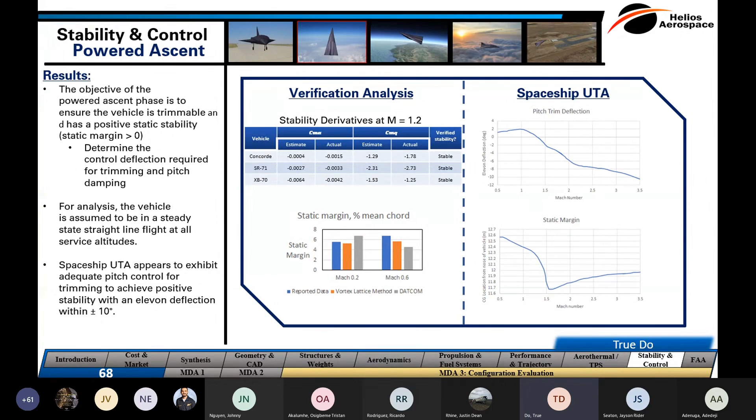Now I'll hand it over to Jason for the upward coast. Thank you, True. The upward coasting phase for this analysis involves determining the implications of inertial coupling and unstable rolling motion at high altitudes on Spaceship UTA.

A process was derived, and it was determined that if the roll rate is less than the pitch and yaw natural frequencies, then it is theoretically not bound to inertial coupling. It is important to note that aerodynamic control effectors are ineffective at this phase, so if the main stability is determined unstable, reaction control systems would need to be utilized.

Upon analyzing Spaceship UTA, it is determined that the rolling frequency made the vehicle unstable at these high altitudes, and that for the next phase, a reaction control system would need to be implemented. This was verified by determining the control torque required by the X-15's reaction control system.

With the control torque determined for Spaceship UTA, these thrusters would need to be placed such that the moment arm is equivalent or greater than the control torque requirement. I will now pass it off to Deji to discuss reentry and unpowered glide.

Thanks, Jason. Now, for the reentry analysis, a couple of factors were taken into consideration when picking a surrogate vehicle. We needed a supersonic vehicle capable of Mach 3 or in the neighborhood of Mach 3, a similar vehicle configuration or with a similar wing planform, and a vehicle with published or declassified data that could be found and used. The F-106B Delta Dart was chosen as a surrogate vehicle for verification for the reentry portion.

Since DATCOM is primarily being utilized for the reentry phase, the program example cases were successfully modified and used to verify surrogate vehicle aerodynamic and stability data. Next slide, please.

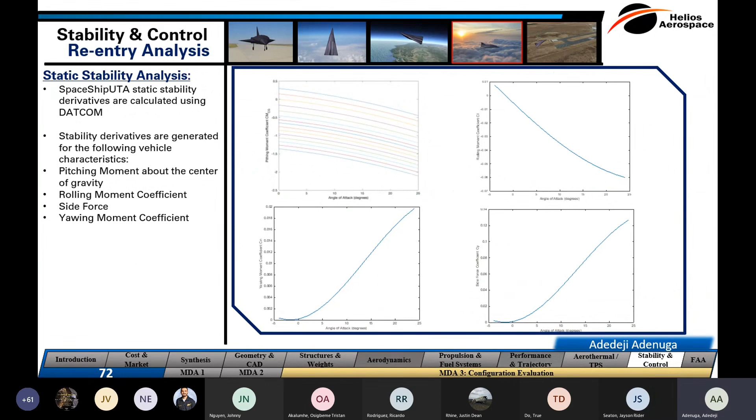Finally, using the neutral point provided by the aerodynamics team and center of gravity location, the static margin during the reentry phase is calculated. So a positive static margin is shown. Next slide, please. That would be all for stability and control.

Thank you, Deji. Now that all disciplines have presented their findings, it's time to see if Spaceship UTA meets the FAA requirements to be certified as a suborbital space tourism vehicle. Licensing and regulatory approval of a reusable launch vehicle is described under Part 14 CFR 431 in the US. The primary objective of meeting these requirements is to ensure all passengers, including the crew, are safe during the mission. The Federal Aviation Administration oversees any atmospheric or space launch activities in the US and has documented certain requirements that need to be met in order to obtain a license for the operation of the vehicle.

Space vehicle licenses come in various types and formats which are bound by specific rules and regulations. They can either be an operator's permit, an experimental permit, or a license. The process duration of these licenses varies from 18 months for a permit up to 5 years for a license. The requirements for our mission can be broken down into two segments: the horizontal takeoff and landing regime and the human spaceflight requirements. Let's have a look at the boundaries associated with the horizontal takeoff and horizontal landing regime.

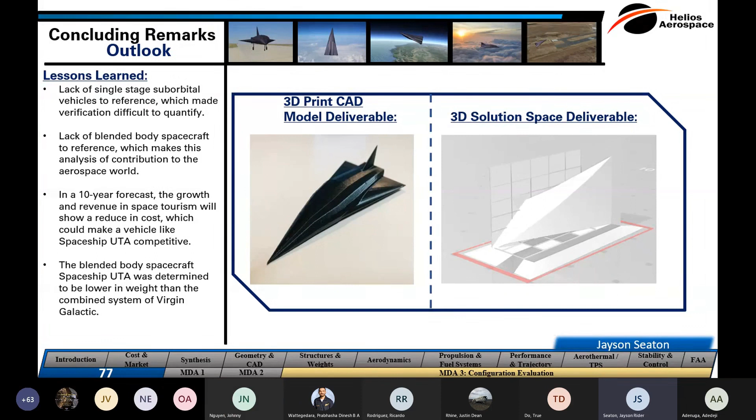Jayson is up next with concluding remarks. Thank you, Prabhasha. To conclude this presentation, it's important to highlight the lessons learned from this project. There are very few suborbital vehicles in general, which made verification difficult to quantify for some disciplines. In our case, there are no suborbital blended body vehicles to even reference, which makes this analysis a contribution to the aerospace world. It is estimated that in the future, suborbital space tourism will have a decrease in revenue cost, which could open the door to an aircraft such as Spaceship UTA. For a direct comparison with Virgin Galactic, it is seen that our single-stage system has a lower takeoff weight than the combined system of Virgin Galactic. This concludes our presentation. Thank you.

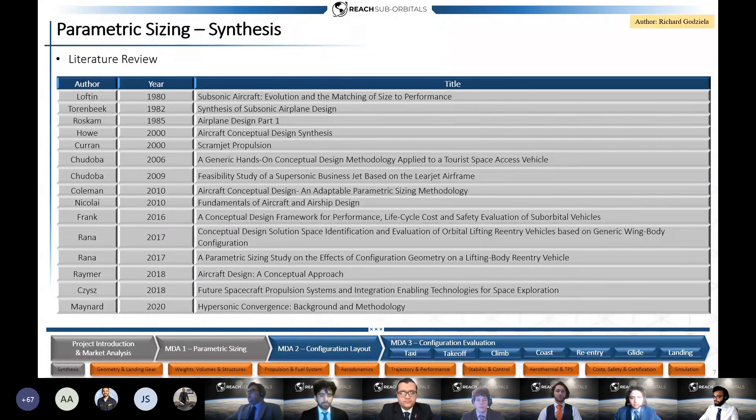Here's the literature review that was conducted by the synthesis discipline. From the results of our literature review, hypersonic convergence was chosen to size Aspiration.

This allowed for an integrated vehicle geometry to be created. The process revolves around solving a weight and volume budget equation until the takeoff gross weight and planform area of the vehicle converge. This allows for a wide variety of configurations to be quickly tested by changing a few input parameters.

Here, the parametric sizing MDA can be seen, which implements hypersonic convergence. The end result of this MDA will be a solution space which visualizes all possible design points, with viable design points with the lowest possible takeoff gross weight selected.

The variety of design points are created by iterating the slenderness of the vehicle, the fuel fraction of the vehicle, and the number of passengers that will be carried by the vehicle.

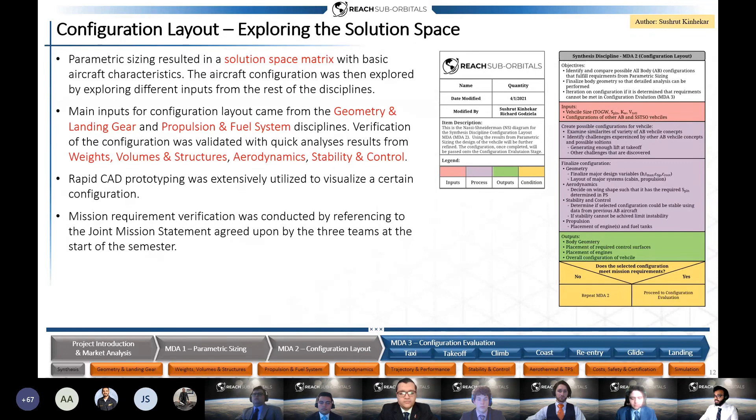Hello, ladies and gentlemen. I have the privilege of explaining how the geometric features of the Aspiration came to be. To begin, the geometry team considered some critical design questions.

Some of the foremost questions on our minds as the engineers of this experience were those of the cabin configuration design. Is it volumetrically efficient? Are our passengers comfortable? And how much space is there?

To see how these questions might be answered, we compiled a detailed literature review supported by research and well-known aerospace authors. From this literature search, a detailed design plan was made, and it is illustrated here. Once we made our plan, we had to check that it worked.

We used our process to make sure the numbers came out correct for the HL-10, a simple and early lifting body aircraft design. It was a success, and the differences between our calculations and the actual known values were within an acceptable margin of error.

With our methodology validated and the preliminary sizing finished, the team could move on to the configuration layout phase. Our team iterated through a myriad of different design points, working out mistakes all along the way to refine the design of the Aspiration.

The first design point was developed as a rough outline of the early solution space model obtained by synthesis. The image shown here is a basic concept model obtained from convergence code visualizers. It was dubbed the ice cream cone for how aesthetically unappealing it is, and it barely followed an elliptical shape.

With an eccentricity of 0.934, our team had to go back to the drawing board.

The second design point was characterized by a slimmer profile, but overall increased volume and planform area. However, guidance from our CEO suggested that the shape of the aircraft would be more aerodynamically efficient at lower speeds if it were slightly more angular.

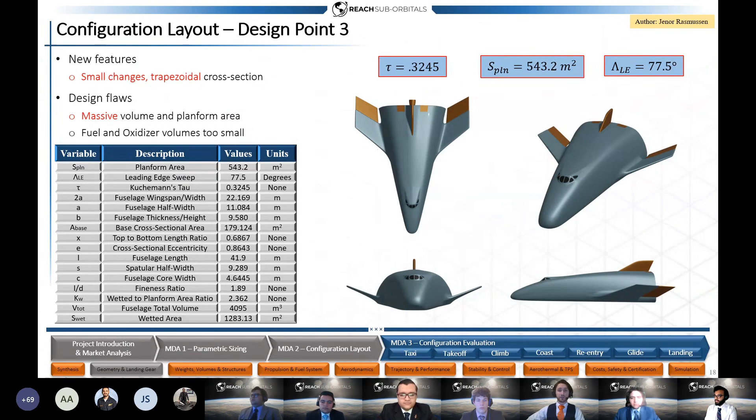An error was found in the solution space code, which led to a complete overhaul of the design. The fourth design point is the penultimate iteration of aspiration, sporting a much smaller volume and area. However, the change in convergence code deemed requisite a change in engine type, since the initial design engines had a lackluster thrust profile.

After this long and arduous journey, the Reach Suborbitals obtained its final design point. Ladies and gentlemen, it is my pleasure to introduce to you the RSO Aspiration.

It has a swept-back delta planform design that helps with flight at higher speeds, and two vertical fins on top to provide stability control. This sleek and stylish profile is sure to carry you to new heights as you reach for the stars. 18 windows allow you to take in the beauty of Earth as you revel in your newfound title of astronaut. A traditional door allows for easy access into and out of the cabin space.

Detailed specifications are shown here, sporting a 74-degree wing sweep, a tau of 0.162, and a planform area of 74 square meters. The Aspiration is a beauty to behold. It is 15.7 meters long and 7.3 meters of maximum width. Inspirations for our design were the Lockheed Martin X-33 and, in part, the X-24B.

A 3D printed prototype of the model has been created as well and is exhibited here. And finally, I have the pleasure of introducing you to the end user experience and a world-first showing of the cabin interior. Miguel Navarro will be your guide in the next slide.

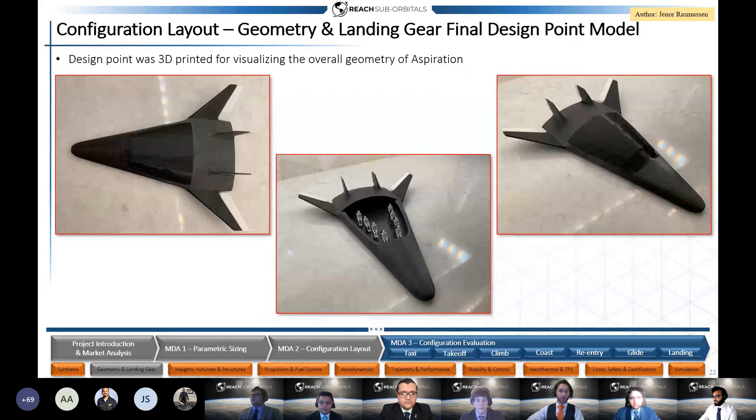Welcome to the best experience you will ever have. Here in Reach Suborbitals, the geometry team worked together to build this cabin, calculating every minute detail to enhance your experience. Walking up and opening the door will start your journey into becoming an astronaut.

Past the door, you can see that there's empty space. This empty space, due to higher volumetric efficiency, will allow you to experience the full weightlessness once we allow you to unbutton your seatbelts for a free roam experience.

Past this, you can see 6 seats that are shaped in a V format. This V format has been set up strategically to enhance the experience, the comfort level, and to maximize safety. Each seat will have windows on the roof and to the side to give you multiple viewpoints.

to see the beautiful blue earth. We designed the seats to incorporate the highest levels of materials that will make it feel like you're sitting in a luxury car driving on the streets of Dubai. The seat is held up on a titanium composite stand that will keep the seat from experiencing any unnecessary motion. Underneath, a light was added around the floor for an additional light source for when you're moving about.

In front of the cabin, the 2 pilots can be seen. These pilots are highly trained and equipped with state-of-the-art equipment to get you to space and back home. Here in Reach Suborbitals, we don't aspire to be better than our competition. We know we have reached that goal.

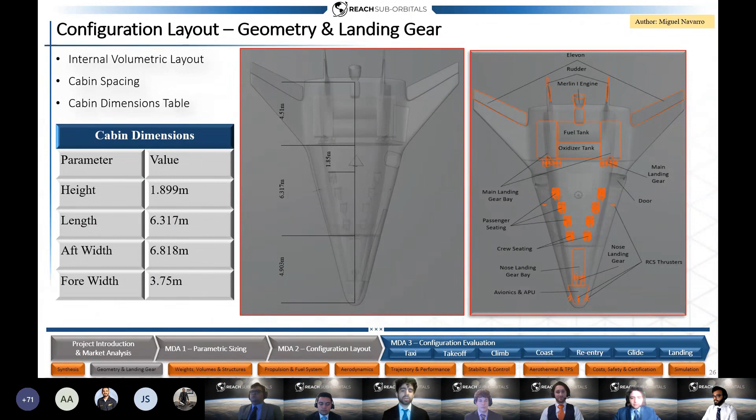During the parametric sizing and configuration layout phases, 2 different propellant combinations were examined. The first being liquid hydrogen and liquid oxygen, the second being RP-1 and liquid oxygen. Liquid hydrogen and liquid oxygen, having a lower average density, resulted in a higher fuel volume and a larger vehicle. The RP-1 liquid oxygen design that was eventually chosen had a lower fuel volume of just over 9 cubic meters.

Initially, the propulsion team began with an off-the-shelf database consisting of rocket engines from various manufacturers. Within this database, liquid engines were prioritized as they achieved higher performance compared to their hybrid and solid counterparts. Most of these liquid engines contain the high-performing bipropellant combination of liquid hydrogen and liquid oxygen. Although this propellant combination results in high tank mass and low mass fraction due to its extremely low density, it will make up for it with its high performance.

Because of this, Aerojet Rocketdyne's RL-10A5 and RS-25 engines were the first two candidates to power vehicle aspiration. Though it was quickly realized that a middle ground could not be found with our design points; either numerous RL-10 engines could not meet the performance requirements, or the RS-25 was proven to be too powerful for our needs, regardless of its throttle setting. The third candidate was SpaceX's Merlin 1D engine, used on the Falcon 9, comprised of kerosene and liquid oxygen propellant combination.

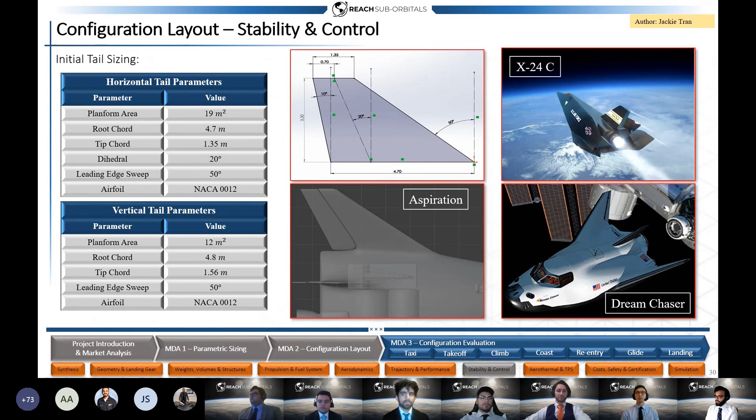The center of gravity is an important parameter for most, if not all, of the team. It determines the placement of the landing gear and reaction control thrusters, the stability of the vehicle, and is used for many other calculations by the team.

The CG, as well as the body inertias, can be calculated by reducing all of the major components, such as the landing gear, fuel tanks, passengers, etc., to point masses and measuring from a reference point. A careful eye must be kept on the CG as it moves during flight, since the stability of the vehicle is heavily dependent upon it.

A tricycle type landing gear system was used for aspiration, and having this system, the load needs to be appropriately divided amongst the main gear and nose gear. To have ground stability, the nose gear cannot carry less than 5% of the load or more than 20% of the load.

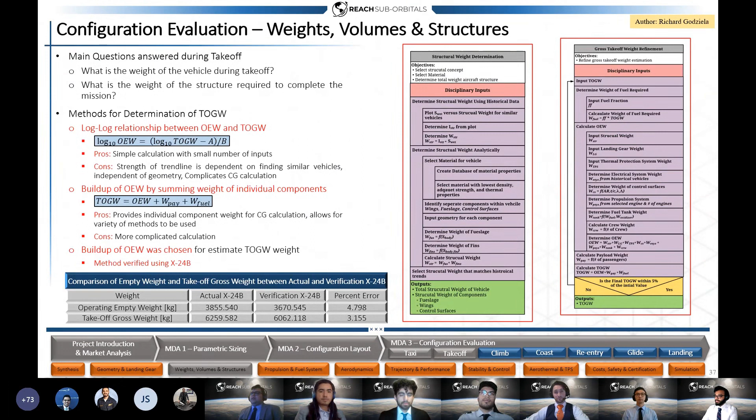The first step of building up the operating empty weight was to determine the structural weight, done using empirical relationships for lifting body vehicles. The structural weight was found to be 4,177 kilograms, with 92% of this weight made up by the fuselage. The material of the structure is aluminum.

The remaining components of the vehicle were also calculated using empirical relationships found for lifting body vehicles.

These weights were then summed to get an operating empty weight of just over 13,000 kilograms, representing a growth of 448 kilograms over the parametric sizing operating empty weight, which is within the 5% target set for the weights discipline.

To finish off the estimate of takeoff gross weight, the payload weight and propellant weights were also calculated, with a final takeoff gross weight value of 23,124 kilograms, representing an increase of 243 kilograms over parametric sizing, also within the 5% difference target.

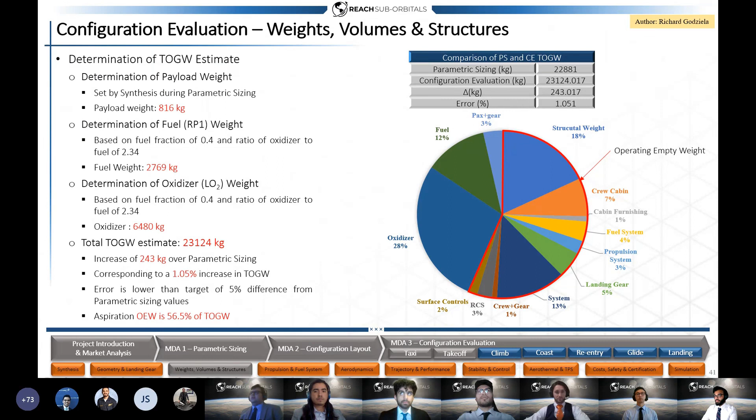This is done by finding thermochemistry values such as the pressure and temperature the fuel reacts at the required altitude. This is passed on to nozzle flow. Through nozzle flow equations, we can find parameters such as thrust and ISP. With thrust, the mass flow rate, or how much fuel is being used, is calculated. The performance team, looking at historical data for the Merlin, told us to acquire the data at the lowest throttle setting.

During takeoff, the aerodynamics of the aspiration are critical. Major questions must be answered: will there be sufficient lift to take off? Will this lift generate too much drag? And can we keep going after takeoff?

To answer these questions, we must take in the flight conditions for takeoff and the geometry of the aspiration. This information can be used to output a parametrically sized VSP model, which helps us produce the aerodynamic coefficients and forces and moments due to the flow.

The process of creating a parametric model involves setting custom parameters based on design requirements of the aspiration. This model can be run through the OpenVSP aerodynamic tools. A parametrically sized model makes for quick and efficient changes, so aerodynamic analysis of every iteration of the aspiration is easy.

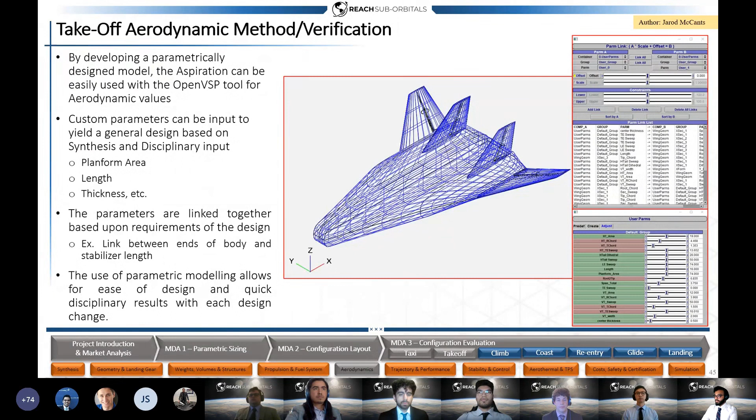In the takeoff analysis for trajectory and performance, some crucial questions must be answered, like the transition to climb altitude, the takeoff field length, and the velocity at liftoff.

The takeoff analysis for aspiration started by knowing that the Merlin 1D engine can be operational at 40% thrust. Therefore, the speed of the vehicle can be calculated along the runway, accounting for the drag force along with the friction force of the landing gear. Aspiration was seen to reach a Mach number of 0.316 for the takeoff speed. The total ground distance was calculated to be 884 meters in length.

The passengers don't feel any G's greater than 0.64 at the end of the runway, and the angle of attack was seen to be 16 degrees in correspondence with the lift velocity of aspiration. The transition to climb maneuver was seen to take 5 seconds to start the climb at an altitude of 1 kilometer. Now passing it on to stability.

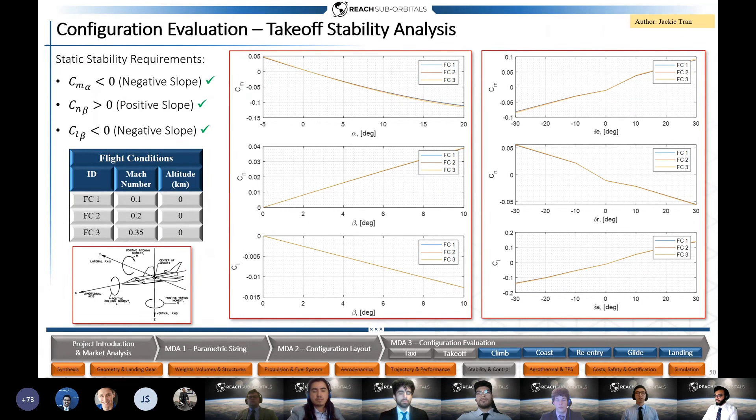According to Federal Aviation Regulations, Part 25 requirements, the takeoff phase needs to have takeoff and climb velocities that are small multiples of the stall velocity, and there must be clearance above 10.688 meters. These requirements are satisfied by the aspiration, and with this verified, we can move on to the next phase.

Throughout the remainder of the presentation, I will have the pleasure of joining you as we dive into the exciting world of suborbital space tourism with Reach Suborbitals.

Ladies and gentlemen, we begin at Mojave Air and Spaceport, located in Mojave, California. If the guests would please take their seats and strap in, we are about to embark on the journey of a lifetime. In just a few short minutes, you will be floating amongst the stars. We promise our destination is out of this world.

Now transitioning over to the climb phase. Having selected the most appropriate engine during configuration layout, the powered ascent configuration evaluation focuses on answering critical questions like what will be the thrust and specific impulse profiles as a function of altitude, how many engines will be required, and if a throttle mechanism will be required for the powered ascent.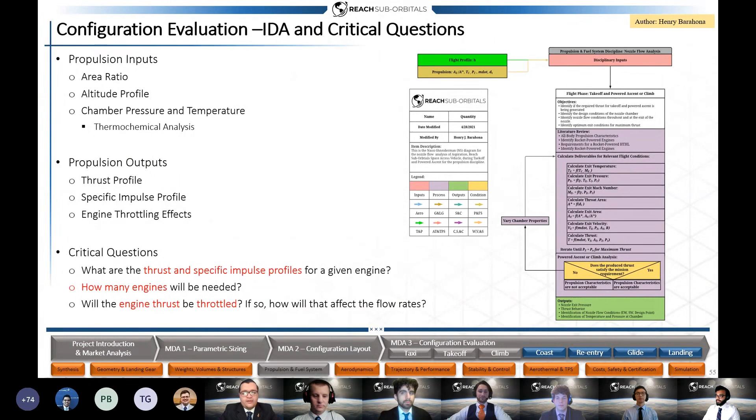To answer these questions, the thrust and specific impulse profiles at 100% capability were determined based on the propellant thermochemical properties and the physical characteristics of the nozzle. Working closely with trajectory and performance, the ascent of a single engine at maximum power was tested, and it was identified that even though a single engine was capable of satisfying the altitude mission requirement, it did not satisfy the maximum acceleration constraint, meaning that it will be required to throttle the engine.

Results from analyzing the thrust to total vehicle weight ratio and the ascent performance indicated that throttling the mass flow rate intake below 65% will result in the vehicle not being able to accelerate and ascend, while throttling above 75% will exceed the load limit. Consequently, the engine throttling was selected to 70%, resulting in the mass and thrust properties shown in the table to the right.

During climb, the aerodynamics of the aspiration are less critical than takeoff, but there are still major questions to be answered. Can the aspiration generate enough lift to rotate through the pull-up maneuver, and can it have sufficiently low drag for the near vertical flight path?

The inputs necessary are the flight conditions and limitations for the drag value based on the thrust available, as well as the model from the takeoff phase. Then the outputs are the aerodynamic coefficients as well as the geometric adjustments where necessary.

Using the parametric model from takeoff, the coefficients can be found for the climb conditions and validated using historical methods. The high-speed flight conditions show drag errors as more refined OpenVSP methods are used.

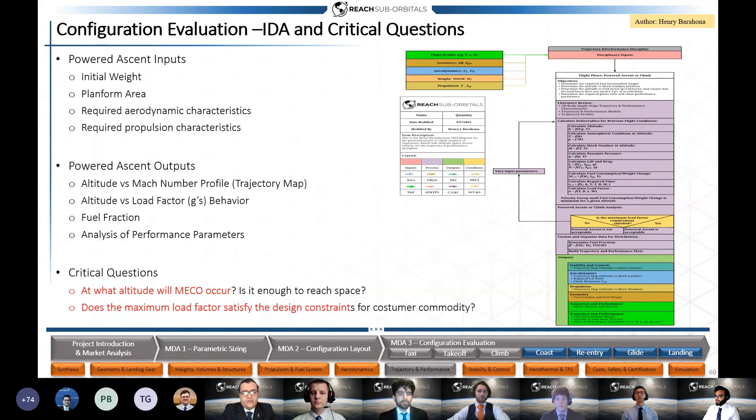Using the energy state approximation method, with an initial Mach number of 0.35 at 1 kilometer as identified from the trajectory and performance takeoff analysis, and accounting for the maximum load factor constraint among others, the main engine cutoff altitude was determined to be at 46 kilometers at Mach 3.52.

From the energy state approximation method, it was identified that to reach space, an energy height of at least 100 kilometers must be obtained. Since such energy height is reached, as shown with the rate energy height contour in the figure to the right, it was concluded that the current powered ascent trajectory will enable aspiration to reach space with a maximum load factor of 2.8, thus satisfying all the requirements.

The same stability analysis from takeoff will be applied to the climb phase. In this phase, we identified 9 important flight conditions.

For the aerothermal analysis of the aspiration, more questions must be answered. How much heat will be generated? How hot will the skin of the aircraft get? And will this be a limiting factor for trajectory?

In order to answer these questions, some values must be known, like the flight conditions and the geometric properties of the aspiration. These will allow for the output of the overall heat flux into the skin, or the energy applied at the surface, and the temperature history of the flight phase.

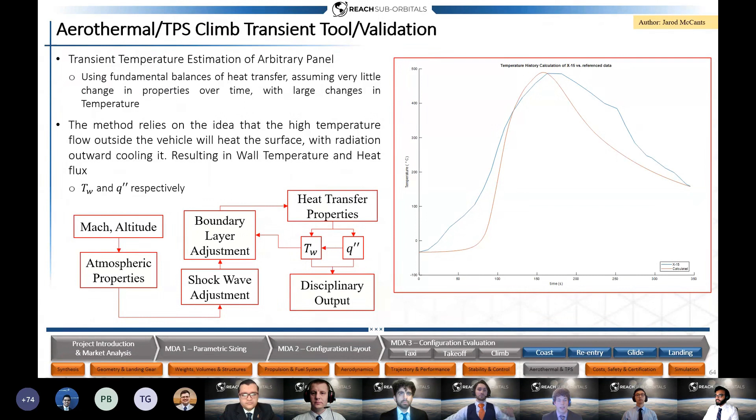Using the validated transient tool, a part of the aspiration may be analyzed under a calculated trajectory analysis to get an idea about peak temperatures and heat flux throughout the flight. This shows the result of such an analysis with the start at the front of the climb phase and ending with apogee. This analysis shows an ability to withstand climb easily without considerable compromise to the current model.

Looking back to those FAR 25 regulatory requirements, the climb phase needs to have a climb gradient above 91.4 meters per minute since it weighs above 2,721 kilograms. It has a climb gradient of 289 meters per minute, so that's way above. And once again, the aspiration passes with flying colors. With this verified, we can now evaluate the coast phase.

Passengers are reminded to please sit back with your chairs in the upright position to avoid redout while we propel you vertically to Mach 3.52 with main engine cutoff at 46 kilometers. For your pleasure and comfort, we will maintain acceleration with our Merlin 1D rocket below 3 Gs for the duration of the climb.

Now transitioning over to the coast phase. The trajectory analysis of the unpowered coast is arguably one of the most important analyses throughout the mission profile, as this is the experience the customer is paying for. Consequently, critical questions like how long the microgravity experience will last and what apogee altitude will be achieved need to be answered. The goal was to achieve a higher apogee altitude and a longer unpowered coast time compared to Spaceship 2 and other space tourism companies in the market.

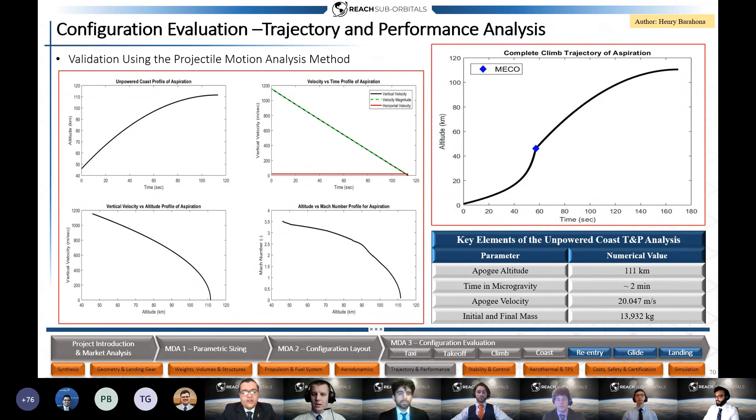For pitch and roll, thrusters are placed on the side in front of the wings, producing 400 newtons. Multiple of these thrusters can meet the control requirements, which has been found to be better than implementing one massive system. It has flown more than 30 times with the Ariane 5 during its ascent phase, which can weigh up to 170,000 kilograms, showing us its reliability as a system.

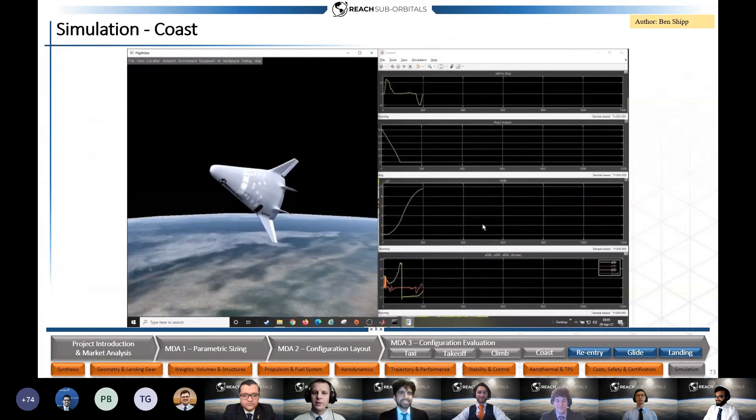Now transitioning over to reentry. Aerodynamics plays a huge role in the reentry phase, making up 2 of the 3 forces acting on Aspiration during the unpowered flight half of its journey back to Earth. A big factor in the reentry analysis is whether or not the vehicle produces enough drag during reentry to slow it down enough before landing. The analysis methodology used to quantify this was solidified across a semester of research.

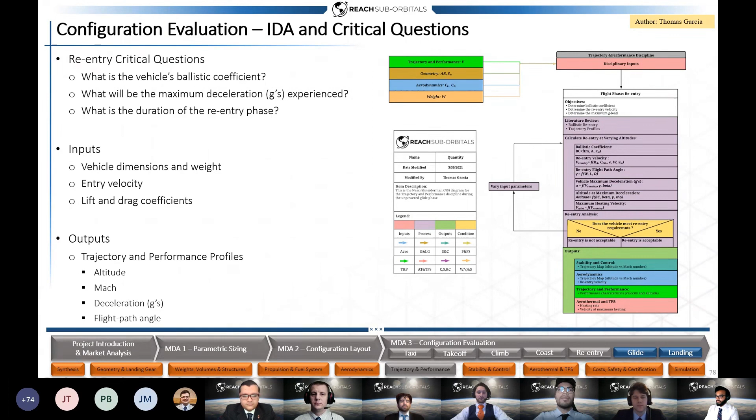Beginning from Apogee, our vehicle behaves like a point ballistic mass in free fall. Using the empty mass, reference area and length, and drag coefficient, the ballistic coefficient could be found, the primary parameter driving ballistic reentry. Coming in at an 81-degree flight path angle, speed and load factor began to rapidly increase. Roughly 35 seconds in, our vehicle has gone from 75 to 45 kilometers, now at Mach around 3.4.

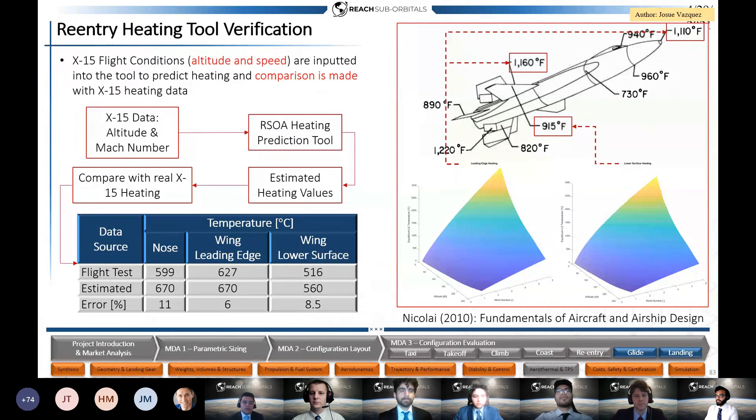As a benefit of moderate Mach numbers, aspiration endures relatively low heating and thus requires only a simple thermal protection system. The material chosen was the NASA Advanced Flexible Reusable Surface Insulation, or AFRSI. AFRSI offers a number of advantages when compared to other options. As a lower temperature TPS material, it is easier to maintain as well as install. There are no tiles to worry about either since it is a woven fabric.

Based on the data received from Jared and Josue from Aerothermal, a worst-case heating scenario was made and the TPS material thickness was sized accordingly using one-dimensional analytical techniques.

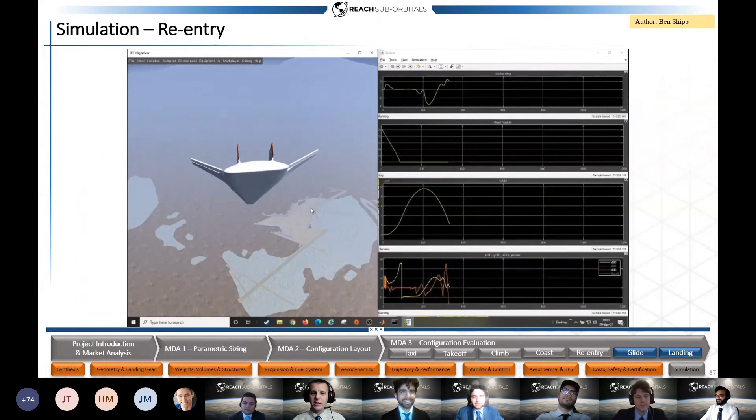Now for the most heart-racing, blood-pumping, and exhilarating moment of our adventure as we hurtled towards the Earth at the breakneck speed of 1,200 meters per second, we approach the 4G pullout. Ensure your seats are fully reclined for proper G orientation. Relax and enjoy the rush.

Transitioning over to glide.

This is the Aerodynamics Glide IDA. It outlines the process used to estimate and validate the glide profile. The inputs are the flight profile and the geometry in order to estimate the aerodynamic properties. The key performance parameter to verify is the glide trajectory with the available aerodynamic performance.

A numerical tool was validated to accurately predict the aerodynamic properties for the vehicle at multiple flight conditions.

An aerodynamic database was developed for multiple flight conditions, and the control surface deflections were also modeled for the stability and control and trajectory and performance disciplines.

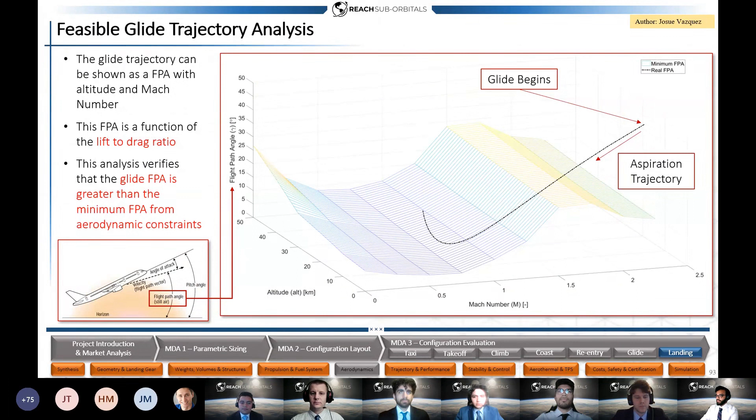The unpowered glide phase aims to answer questions such as at what rate will the vehicle descend, what will be the duration of the glide, and what is the maximum range through the glide phase. To the right is the IDA methodology influenced by texts from Roskam, Phillips, and Nicolai. Using the IDA to aid in answering these critical questions, vehicle dimensions, previous flight phase conditions, and aerodynamic coefficients are all inputs required to output the altitude profile, vehicle glide range, and rate of descent.

Continuing immediately after its pull-up maneuver, the glide phase begins at an altitude of 7,063 meters with a Mach of 0.8. To meet its target altitude of 200 meters, the vehicle's lift-to-drag ratio is used to minimize the rate of descent, and its flight path angle is used to maximize glide range. Throughout the glide trajectory, the vehicle's flight path angle changes ever so slightly, ranging from 4.5 to 5 degrees, achieving a rate of descent of 12 meters per second and a maximum glide range of roughly 85 kilometers.

After 11 minutes, the vehicle slows to a Mach of 0.2 and reaches an altitude of 200 meters, reaching its target altitude and velocity, concluding the glide trajectory.

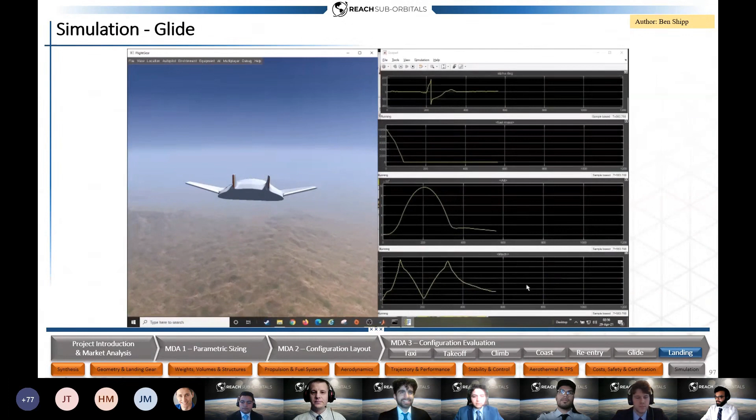Now transitioning over to the landing phase.

Once the landing gear is deployed, the center of gravity location will shift, as well as the body inertias. Upon deployment of the landing gear, the center of gravity shifts back and shifts down slightly. Also, upon landing gear deployment, the body inertia about the rolling axis increases, and the body inertias about the yawing and pitching moment axes decrease.

This is the Aerodynamics Landing IDA. The inputs are the flight profile and the vehicle geometry. The key parameters to estimate are the ground effect and the landing gear implications into the aerodynamic properties, and to ensure the wing is correctly sized for landing.

The main aerodynamic parameters are estimated with the same tool as for the glide trajectory. However, when the vehicle flies very close to the ground, it experiences a lift increase and a drag decrease due to ground effect. The model shown here can correctly estimate the ground effect aerodynamics for an F-15 based on its flight test data.

The ground effect does not become significant for a vehicle until a height of about 5 meters off the ground. This ground effect causes a 26% improvement in aerodynamic efficiency. As far as the landing gear goes, the drag was estimated based on existing vehicle data. It was determined that when deployed, the landing gear will exert a 15% increase in the total vehicle drag.

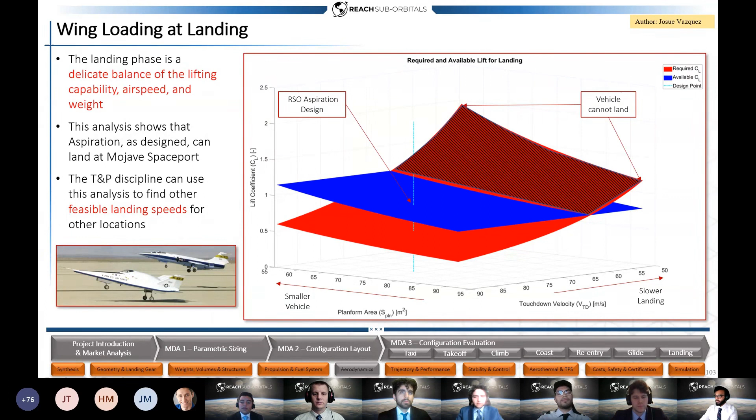In the landing analysis for trajectory and performance, some crucial questions must be answered, like the approach velocity and the landing field length to bring Aspiration to a complete stop. Onto the next slide.

The landing phase analysis for Aspiration is determined right after the end of glide flight. The components needed to begin the approach require variables such as lift and drag forces upon the vehicle. This can be determined by providing a Mach number, angle of attack, and altitude for the vehicle. In my analysis, Aspiration starts its approach at an altitude of 200 meters above the runway.

Aspiration has an approach velocity of a Mach number of 0.22 at an angle of attack of 14 degrees. The next part of the landing phase is the flare maneuver, which is going to start 238 meters away from the runway. Once at touchdown, the vehicle is going to slow down to a speed of 66 meters per second.

After this, Aspiration will start its free roll of 200 meters, and then the brake system will kick in. Therefore, the Aspiration braking distance will be 367 meters long around the runway until it comes to a complete stop.

The trajectory analysis for all the mission phases were collected by T&P lead engineer Henry to show the total trajectory of Aspiration. Now onto the next slide for certification.

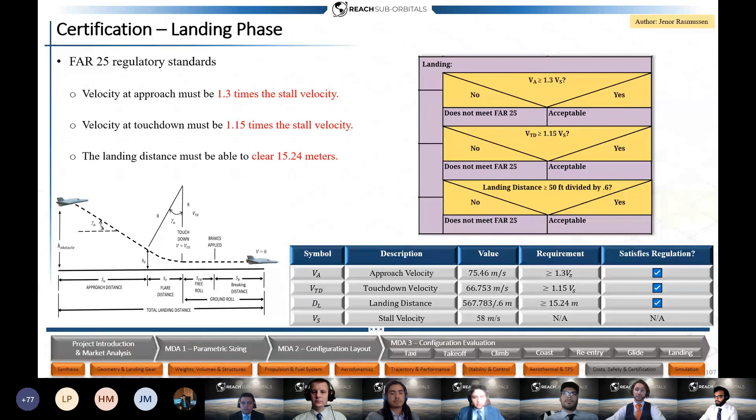Next slide. The MDA for cost, safety, and certification are combined into one master MDA to ensure that the design point follows all safety certification protocols while ensuring an affordable space tourism experience.

To estimate how much that space tourism flight costs, the TransCost model was used to determine its direct operating costs, development cost, manufacturing costs, as well as operating costs. The TransCost model was used, and the SpaceShip 2 data was used to validate and verify those methodologies. The TransCost model provided promising results.

We first calculated the airframe development cost along with other manufacturing costs, and since we were buying a commercially off-the-shelf engine, we didn't need to develop an engine development cost.